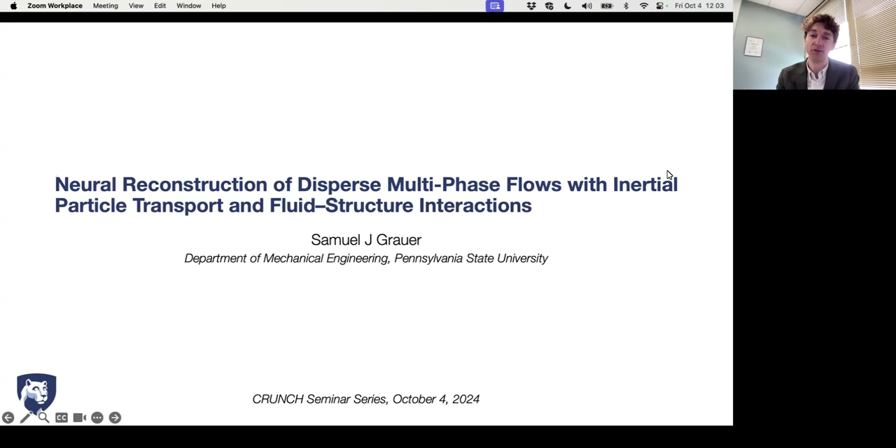So before I say anything else, I have to acknowledge my group who does excellent work, and it's a pleasure to work with all of them here at Penn State. Particularly with respect to the work I'll show today, I have a student, Joe Molnar, Ree Tang, and Ke Zhou, who've done most of the work. And really, this is largely Ke's work. So all credit goes to them.

Sorry, just got to close that out there.

All right. So what I'll talk about today is related to a measurement technique called Lagrangian particle tracking. I'm going to start by introducing that method and describing why we do it. Throughout the talk, I'll get into some of the complexities that LPT brings with it and why we need to think hard about the details of Lagrangian particle tracking if we want to use a PINN for reconstruction.

So to start off with, many flows in nature are turbulent, and also in engineering devices. We want to be able to utilize turbulence for our benefit or mitigate it in cases where it has adverse effects. So maybe we want to keep a boundary layer attached, and so we want a turbulent boundary layer to entrain momentum. We might want to promote mixing. We could also be trying to fight off drag and mitigate turbulence or reduce noise.

So the question is, why can't we just use simulations? Why would we need to do something like Lagrangian particle tracking at all? Many flows are challenging to simulate, so that's going to be the crux of the answer. This is especially true if you don't know the boundary conditions. I might have a flow where the area of interest in an engineering device couples to a very large system. I can't resolve the whole system, and I don't know what's coming in and out of the domain where I would like to simulate the flow.

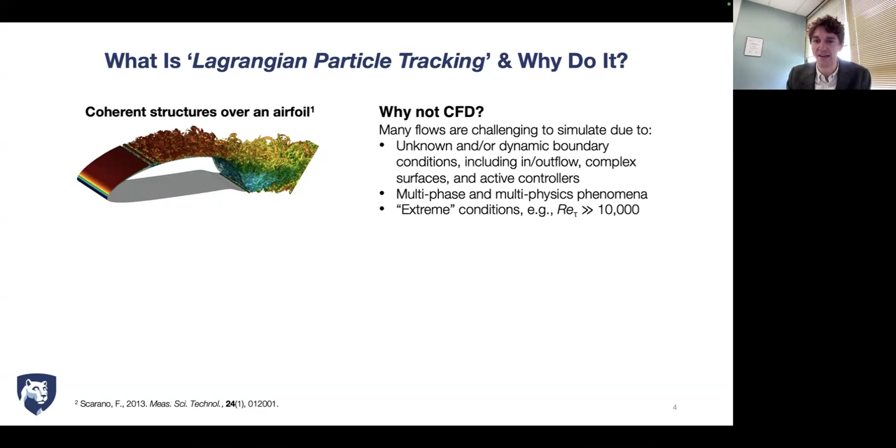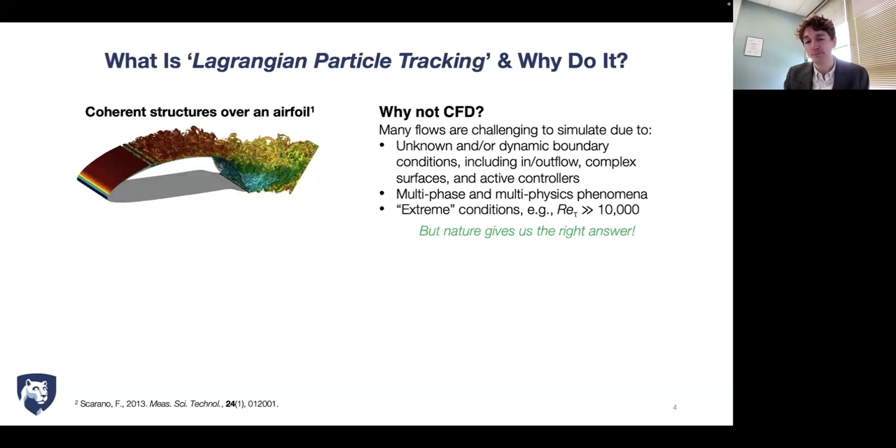And in many cases, we're dealing with really extreme conditions. If I've got a friction Reynolds number well in excess of 10,000, you're really outside the scope of what we can do numerically. But nature gives us the right answer. So we can use experimental techniques to observe how flows really work. That can be essential not only for understanding fluid dynamics, but also for specifying models that we can rely on in a design process.

That's kind of a starting point. And really, we would like gradients in all three directions. And so we'd like to be able to extract vorticity, and vorticity fluctuations are going to play an important role in the transfer of energy from large scales to small scales. And we would like to be able to observe those dynamics.

So we need to resolve a large dynamic range. We have to see large structures, and we have to watch them break down into smaller structures. So we might need a dynamic range on the order of 10 to the 3.

And we want to be able to accurately record fluctuating quantities, not just flow derivatives within the field, but also fluctuating quantities on bodies, such as pressure and viscous forces. And that's the kind of library of results that we want to have at our disposal, ideally, in order to really study the fundamental dynamics of a turbulent process.

And so that's going to restrict us to tomographic PIV and Lagrangian particle tracking. And for reasons I could discuss in the Q&A, I will basically ignore tomo PIV because it has resolution limits that make it less practical if you really want to do cutting edge measurements. And so we're going to go after Lagrangian particle tracking. And I know this is going to be a computational talk, but it's really important to understand the experiment to see how we're going to deal with the data.

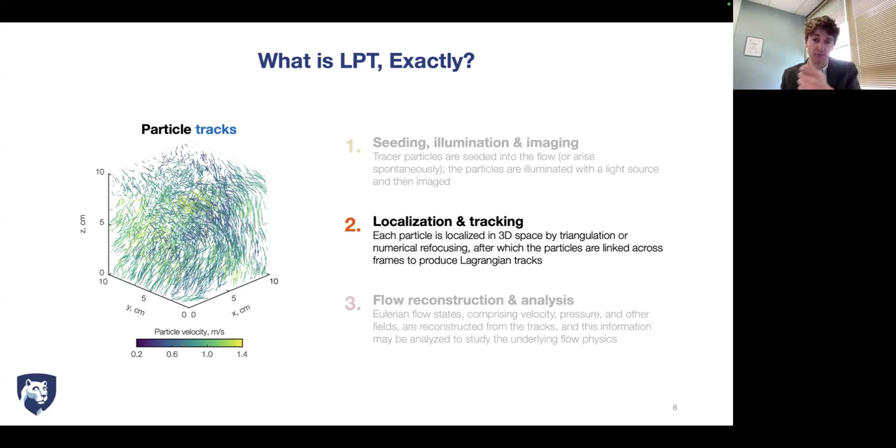And once you've done the tracking step, you get this scattered set of trajectories or tracks. They look like this. And that can already give you a lot of information, especially about Lagrangian coherent structures and statistics within the domain. But what we ultimately want to do, which can improve the accuracy of both of those things I just mentioned and open up new pathways of analysis, is to reconstruct the full Eulerian flow states. So that's what we're going to be after in this talk, is how do we do a good job of taking the data we get from LPT and reconstructing continuous flow states.

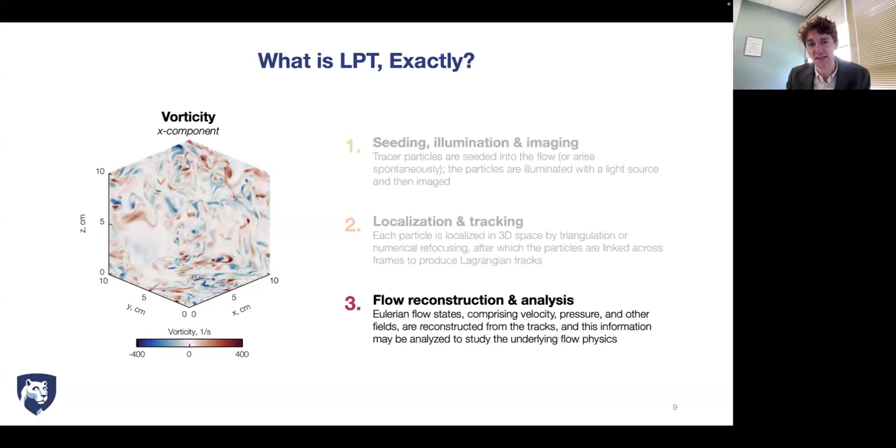So we're going to do that with PINNs, and we're going to use PINNs in a nice way that's going to allow us to really push the bounds of what we can do with them, both in terms of incorporating new physics, in terms of dealing with noisy data, and in terms of representing highly turbulent flows. And so the architecture looks like this. I'll walk you through it. It's modular, it changes depending on what type of flow you're looking at, but it's basically a fairly straightforward application of PINNs to LPT problems. So some of the challenge is going to come in how we deal with loss terms and so forth.

But to start off with, in my group, we usually use Fourier encodings. So we've seen nice recent results using Kolmogorov-Arnold networks, and we're interested in using the tweak where you have a spectral basis as opposed to the B-spline basis, which maybe can replace the conventional MLP and encoding combination. But we find that just including an encoding gives you a very robust increase in the bandwidth of flow states, the spectral content of flow states that you're trying to reconstruct. So it's a robust tool, and we always add them.

We then have a model for the flow, and here I'm drawing this as one network, but the thing to point out about it is that we found through pretty extensive testing that if you have flow variables with different spectral content, you're going to get more bang for your buck per parameter by having a dedicated MLP for each set of variables that shares an energy spectrum. So for instance, in homogeneous isotropic turbulence, you have -5/3 scaling for velocity, you have -7/3 scaling for pressure. You get a more efficient representation controlling for the number of parameters if you have a velocity net and a pressure net that are separate.

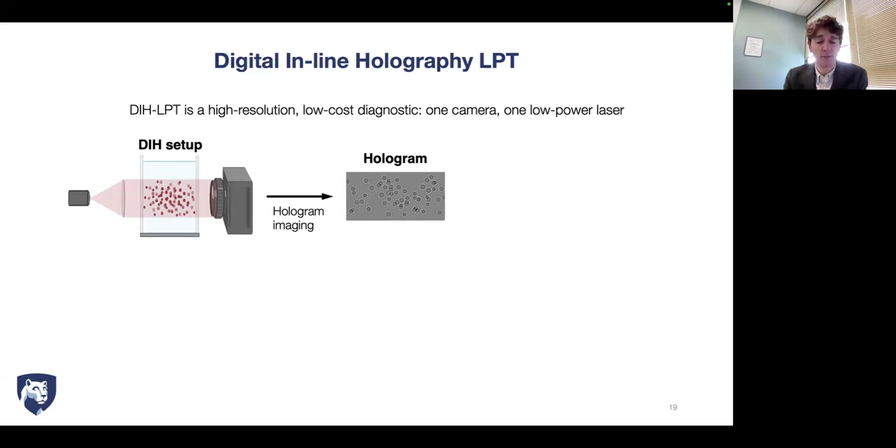The way it works is that you have a single camera, a single laser. You can actually do it with more lasers. That's how Professor Katz's group does that at Johns Hopkins. But in many cases, you use a single laser and a single camera. You spread your laser beam out into a slab and you image it onto the camera sensor. And if you've got particles in between, light is going to scatter off of the particles and you'll be able to record the interference pattern.

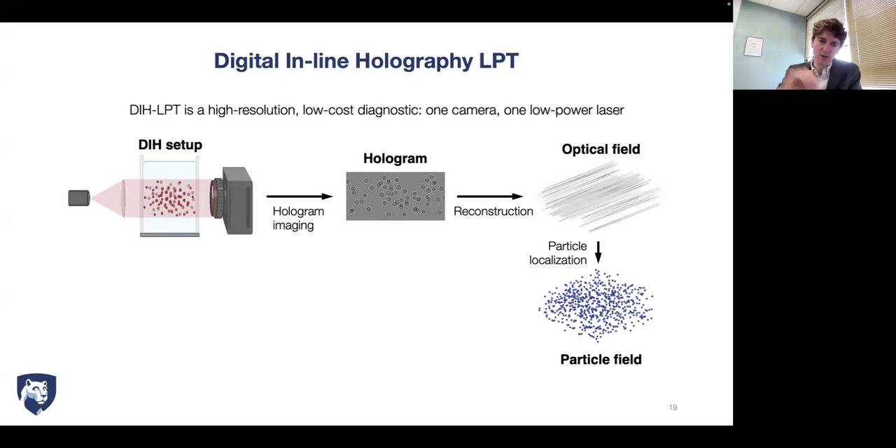So you get a hologram and you've got these particle dots with Airy disks around them. And you can numerically refocus that pattern to recover an optical field. And you can try to locate the particle. It's going to be at the waist of all of these optical filaments. And I can discuss this in more detail later, but it's not the focus of my talk here. But so you locate each particle, you track it, and you reconstruct the structures as always.

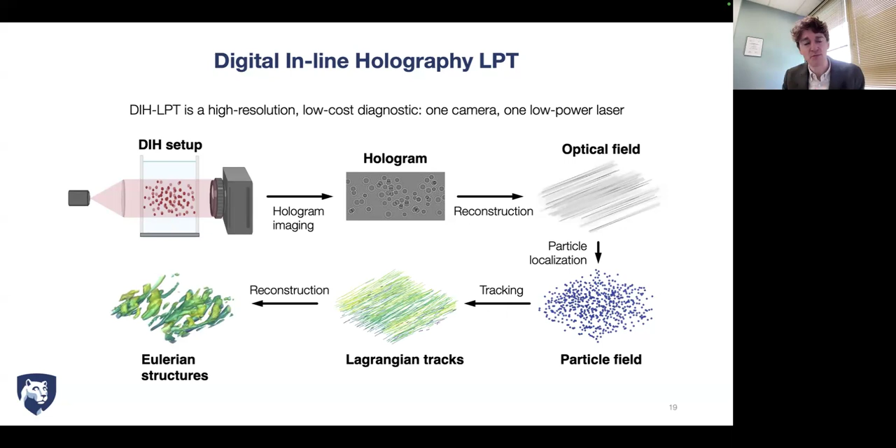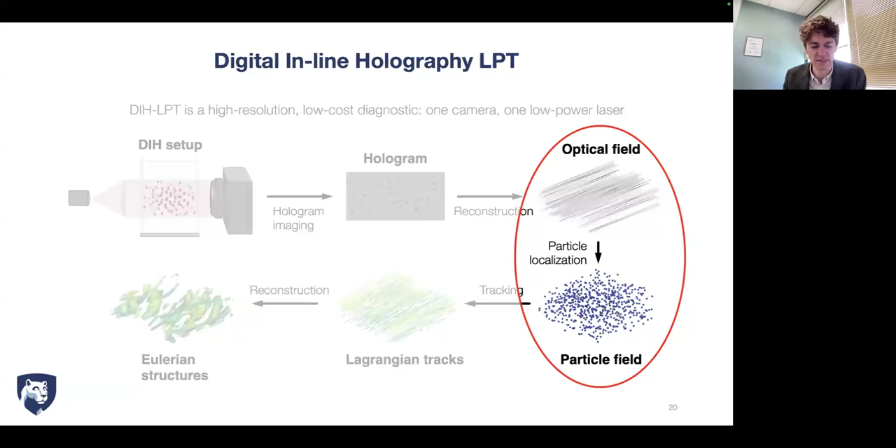What makes LPT hard is that we've got a depth of focus problem, and we have a single camera. And so we're going to get very noisy estimates of the particle position in one of the dimensions, which is the direction normal to the camera, so the optical axis. We're going to have very large uncertainty. And so the resulting distribution is going to be anisotropic, which means that if you just have a default treatment of the particle positions, you can end up with big problems, as you will see.

So at the beginning, we're just going to have an implicit particle model, meaning that our assumption is the particle is a faithful tracer that follows the flow, and we can just deal with outputs of the flow model to determine what happens to particles. So we don't have any special model for the particle.

What most people do when they reconstruct Lagrangian particle tracking data is they say, okay, I've got the particle at position 1 and position 2. I'm just going to do delta x over delta t. That's my velocity, and I'll assign it to the midpoint. And then I just take the outputs of my PINN. So I query the PINN at that midpoint, and I compare the velocities, and that's what I use to train it. That's the data loss in my network. And that's okay in many cases, but as soon as you want to go to high-speed flows, you start to encounter problems with that assumption that you've got a uniform velocity from time 1 to time 2.

And we're going to have bigger issues if we want to deal with anisotropic distribution of particle position errors. So the first thing we said is, well, you could just integrate the particle position. So I've tracked the particle at time 1. I've tracked it at time 2. If I take my PINN solution and I integrate it between the times, I will get another position at time 2, and my data loss can just be the difference between those.

But you have to have quite large interframe spacing, and the frame rate has to be relatively low in order for this to be very helpful. Where the technique becomes helpful is when you consider the distribution of uncertainty. So what we do is we have a localization PDF for the particle, and we can advect that entire PDF. So you can do that in a variety of ways. You can do advection of an arbitrary PDF through Monte Carlo sampling.

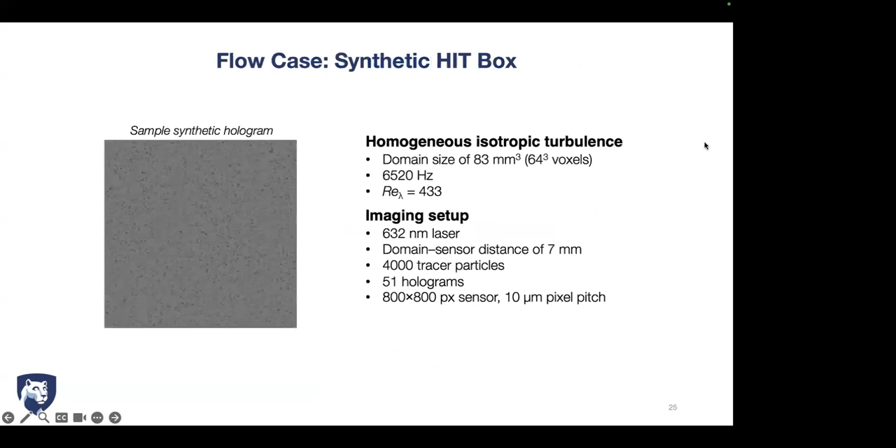Hi, Samuel. Hi, this is Juan. I have a question. Yes, please.

Could you please explain again this part? You're starting with your X1, X1 hat, and then you use your PINN to move to the next step. How? Would it be just like asking your neural network to predict X2? Sorry, I should have been more clear about that. So your neural net, you have the flow model. So you've predicted velocity at the point where the particle was located. And if I predict velocity, I can integrate that over time from time one to time two. Oh, okay.

So you're integrating. Yes. Okay, and how are you integrating it? So we used a second and a fourth order Runge-Kutta method. So it's explicit integration. Oh, okay, I see. Great. So it's somehow similar to the idea of neural ODEs, right? Because they define a model for one state and they move forward using Runge-Kutta or time stepping. Yeah, in a sense, yes. In that we're integrating the outputs of the network.

So in that sense, it's quite similar to a neural ODE, except that we're not trying to discover that dynamical system here. So we're not trying to discover the dynamics. We're trying to discover the flow behavior. We're learning the velocity. It's very similar though. You're right. There's a strong analogy. Oh, okay, great. And then you do it many times for each particle? We do it for each particle, and then actually in the stochastic technique, we do it for each particle many times.

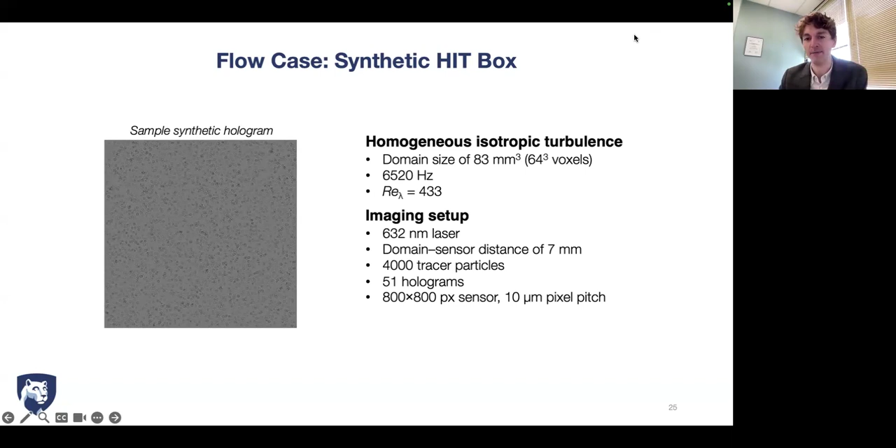But basically, we form the holograms. We do the standard workflow for getting the particle positions and the tracks out of this kind of data. This is just a representative hologram, what it looks like. So remember this picture. When you see the experimental hologram, you'll see that this is very nice. So this is quite ideal. And then this is what reconstructions look like.

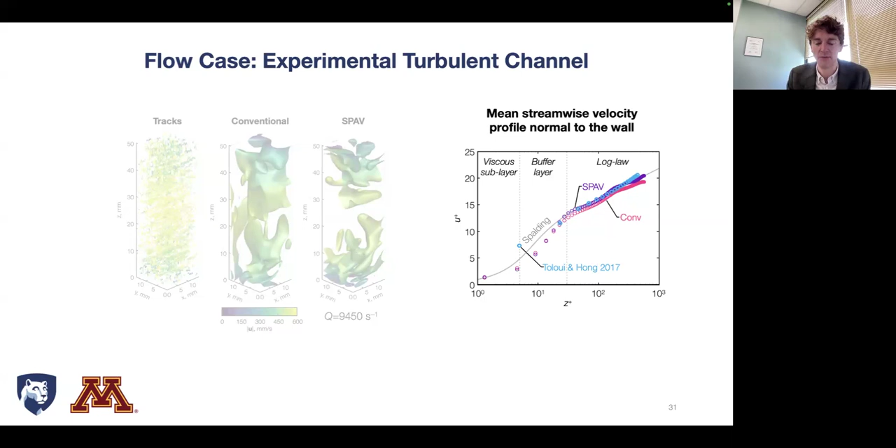But SPAV was very expensive. So for each particle, we're doing thousands of samples for each step to get that advected PDF. And so we wanted a way to just get to the maximum likelihood estimate in a single step. And that also unlocked the techniques that we ultimately developed for dealing with inertial particles as well.

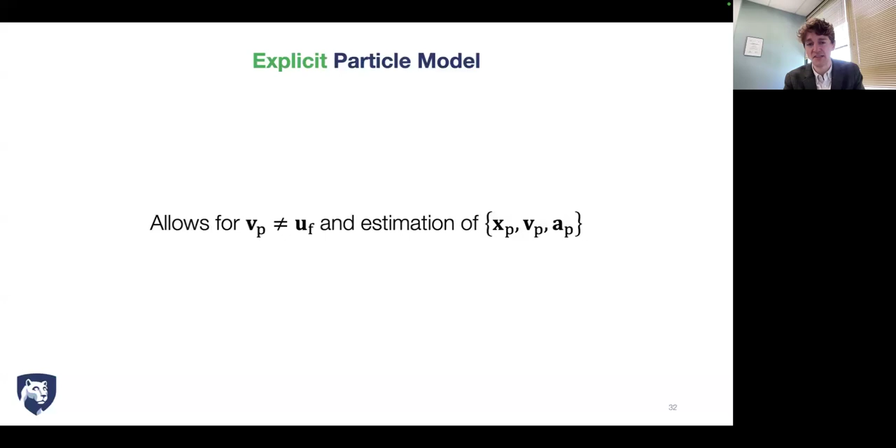So what we do now is we introduce an explicit model. So instead of just having a PINN, we're going to have a PINN and something else, which is going to describe the velocity of the particle. And that velocity doesn't have to equal the velocity of the fluid anymore. I mean, sometimes we will want it to, but not in every case.

And so we start off with just a schematic representation of a track, and we're going to use something called the theory of functional connections to ensure that the kinematics of this particle trajectory are respected. So our model is going to look like this. P is the model. We've got some set of parameters, theta, and the K is the index of the particle. And it's going to map a time to the velocity of the particle at that time.

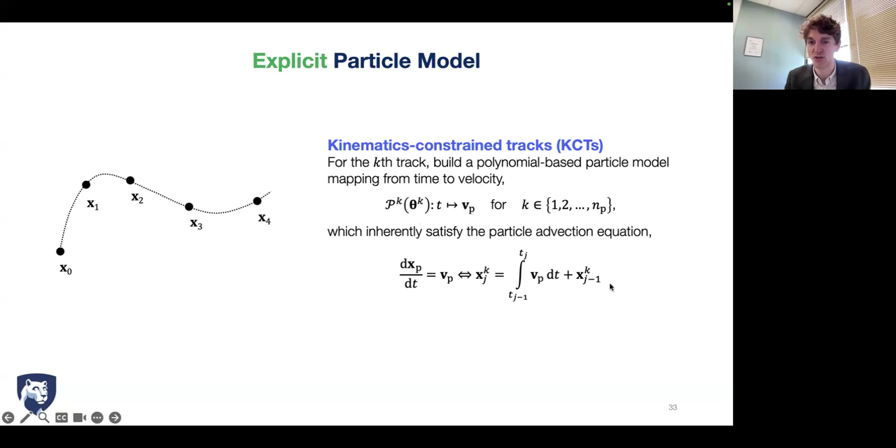And so if we were to integrate that velocity, we should get that the integral from time 1 to time 2 always satisfies the displacement between the tracked positions. And theory of functional connections gives us a way to enforce this as a hard constraint while we retain an unconstrained optimization of a free parameter. That comes from Professor Mortari at Texas A&M.

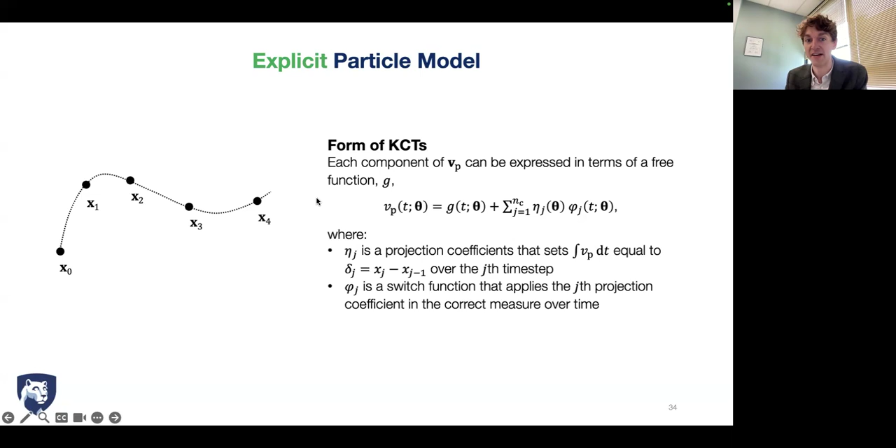And so this is just a single component for simplicity, but we've got a free function G, which can take any form. And we've got a set of constraints that I won't go into in detail, but we've got a preprint which gives the derivation in a nice sequence. We're going to have projection coefficients, which are going to ensure that that integral is satisfied, and then switch functions that turn those projection coefficients on and off. And the result is that for any free function, I can come up with these constraints such that the resulting function will always satisfy that advection equation.

So I'll skip over some details that aren't super important here, but we can factor that into a matrix form, which is going to be very nice for inputting it into TensorFlow or PyTorch, or pick your favorite differentiable programming environment. And so we've got a vector of times, so just polynomial increments of t, and we've got some matrices that we can compute ahead of time. The important thing that I want to note is we've got this vector delta, and that describes the displacement between particles. So if I really trust my data, I can just ensure that that is respected as a hard constraint.

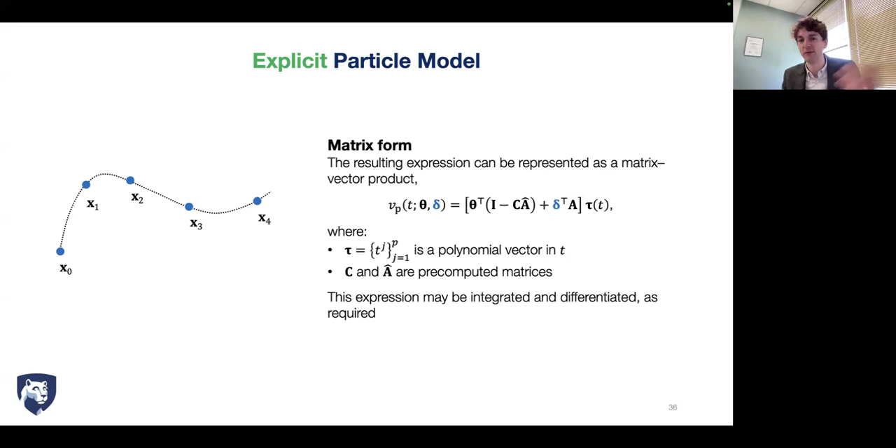But if I don't necessarily trust my data, now I can shift these particle positions around without changing anything else. And so then I can have a data loss, which says, well, I expect those positions to be close to where I tracked them, but I will use the PDF that I described earlier, this localization PDF, to discount particle positions that are very far away from the track location. But we've got some flexibility.

And then we've got this totally unconstrained parameter theta, and unconstrained is nice because we want to use SGD to optimize these alongside the PINN. And so these are random draws from theta, and you can see that no matter what I say for theta, I will always get a velocity history that integrates to the tracked positions. So this is the explicit model that we're going to use in the optimization. We've got one of these for each particle. And, like I've been saying, we can optimize theta and delta, and no matter what, we're always going to satisfy that advection equation. And we can also just fix delta if we've really got highly trustworthy data.

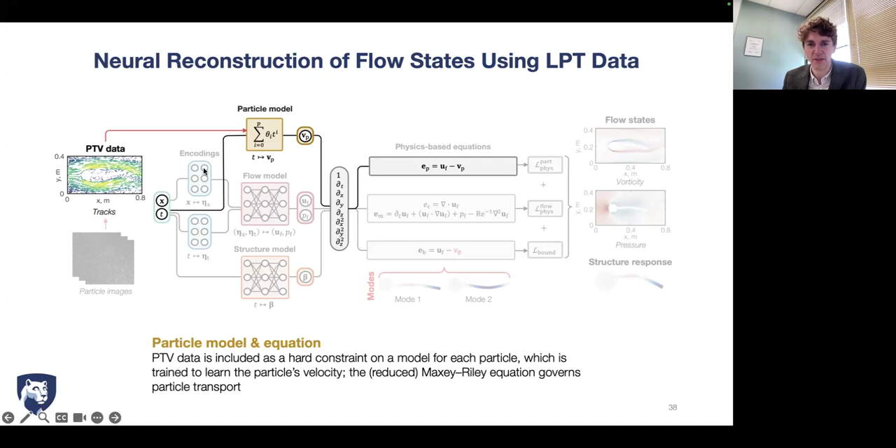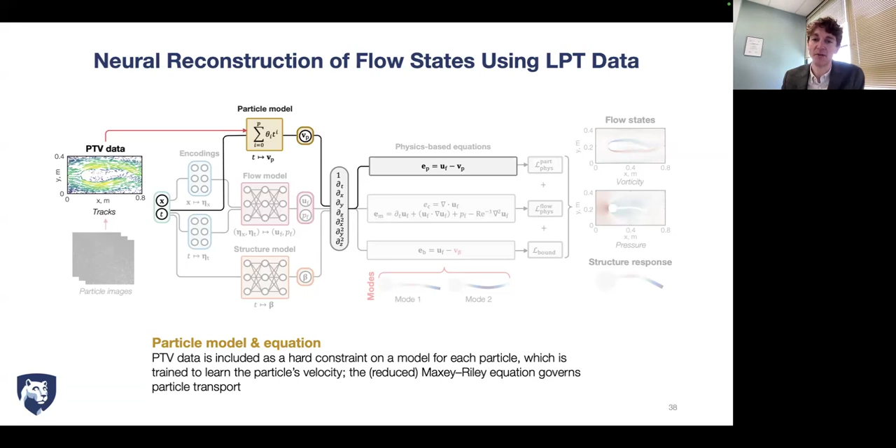So all of that relates to that yellow box from before, the particle model. And so we have a physics equation which says that I expect the velocity of the particle to match the velocity of the flow. We'll relax that later. But for now, we're just going to assume that we do want those velocities to match. But we're going to allow the position of the particles to float.

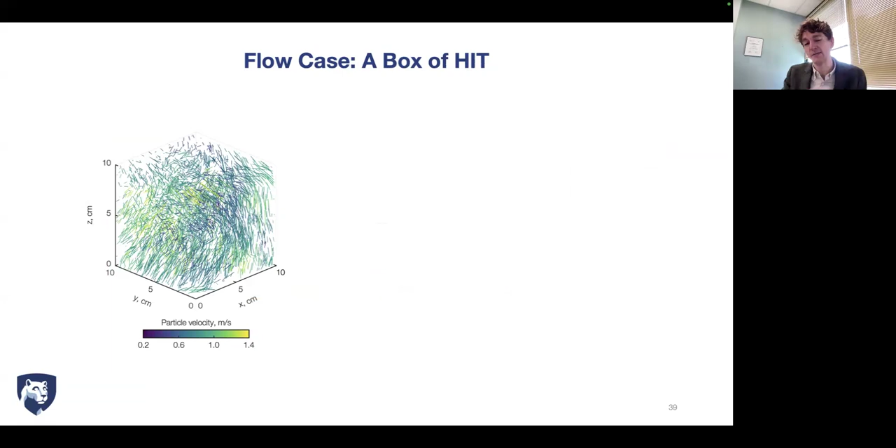And so here I'll show an example where we've actually got a much lower magnitude of noise. And this is inspired by a more conventional PTV experiment. And it's a much larger box, so this is already getting to be quite a turbulent flow. The level of turbulence is the same, but the bandwidth of the function that you have to represent is much broader now. We've got more low frequency content.

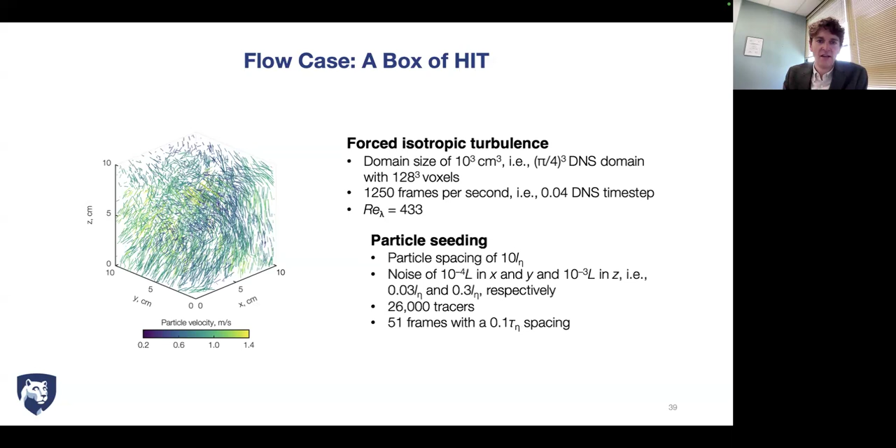And so again, we've got some information about the experiment, which I can come back to if people are interested in it. But the takeaway message is the reconstruction. And if you look closely, here again, we've got a snapshot of the DNS. We've got U, V, W components of velocity and pressure. And all of these reconstructions are quite good. The level of noise here is about a factor of 10 lower than for a digital inline holography experiment.

But you can see if you look very closely, and I'll show you errors, that if you inspect these, you do have higher frequency content being resolved as you go from the conventional technique. So just assuming that the velocity that you get from your track, so maybe you've got LaVision software, or maybe you've got your own tracking software, but if you take that velocity as the truth, you're doing a bit of filtering because you've got errors in your data. If you do SPAV, you get a better result than if you do the conventional method. And if you do this neural-implicit particle advection thing, which I've described just now, so this explicit particle model, you're going to do better still.

But a key point is that we've reduced the cost by nearly an order of magnitude by shifting from SPAV to NIPA. So now the cost is totally on par with the conventional method. And so simply by adding a particle model, we can deal with the noise more effectively. And by eye, if you look at errors, you can see, okay, we've got high errors and then we've got smaller and smaller errors. So you're getting a much more faithful reconstruction the further you go.

And I have a question because before you used, I think, the same database and the conventional was not as good. What makes conventional good in this case? Yes, so this is just the data sets I had on hand for making slides, unfortunately, but this is much cleaner data. So it's about an order of magnitude less noisy than the DIH. What do you mean cleaner? So this is recorded with multiple cameras, and the particle localization step is very accurate. Oh, so it's an experimental data set. This is still synthetic. So I'll show experimental data in a few slides.

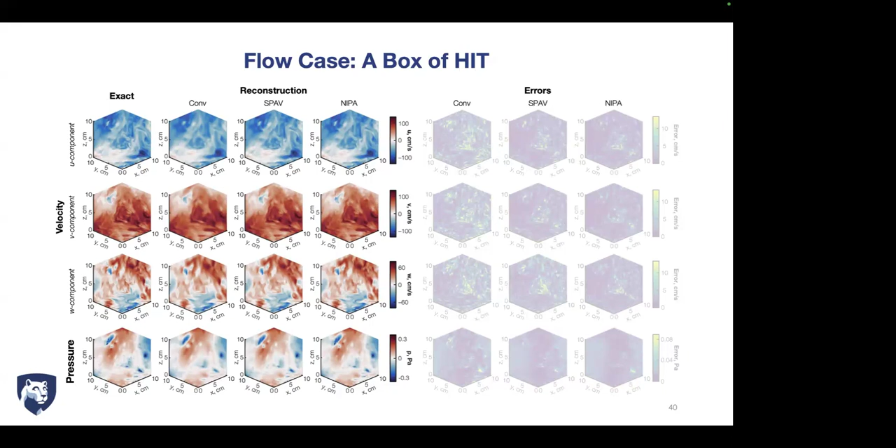How do you introduce the noise? It's random Gaussian errors with a slightly elongated uncertainty along the Z. Okay, that's a better way of saying it. Okay, sorry. I'm used to talking to experimentalists, and so then it's like, oh, sure, representative noise for multi-camera. But yeah, it's additive Gaussian noise. We've got a factor of 10 to 1 uncertainty in the Z direction. Got it. Thank you. Yep.

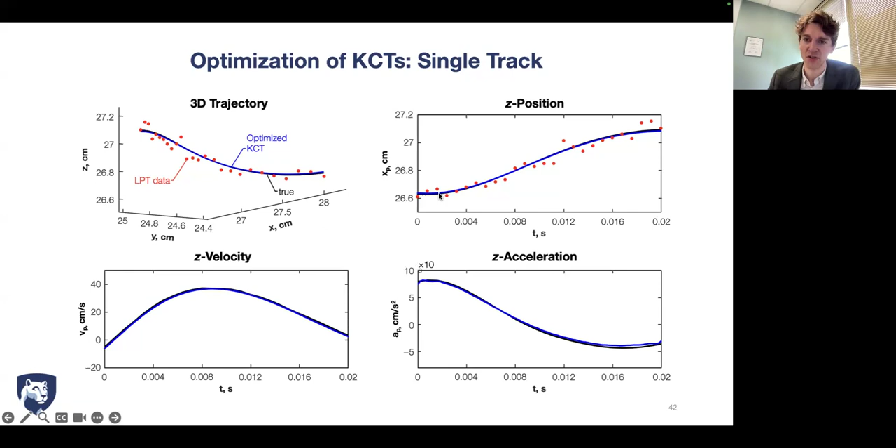So the optimized track is sitting totally on top of the black track. You can kind of see it if you squint and look at the ends, but the optimization is quite effective. So the algorithm is moving the particle positions around, and it's trying to find a track that's consistent both with the data that you've recorded and also with the flow that's going to satisfy the governing equations. And so if you look at position, velocity, and acceleration, this is all in the Z component, because that's the direction where we're more noise affected. We have a very accurate resultant track estimate after the optimization.

So we did extensive benchmarking, and that's where this notion of the camera came about and why we wanted to understand how this worked with the much lower levels of noise. We did an extensive benchmarking campaign with LaVision and with the DLR. And the reason for that is that those groups have produced the VIC# algorithm within the LaVision DaVis toolbox, which is probably the predominant commercial tool that's used for Lagrangian particle trajectory

or tracking, sorry. And the DLR has a FlowFit algorithm, and between the two of those are sort of the state of the art in what people do for data assimilation for LPT in general. I think both of those groups are probably interested in experimenting with PINNs now, but these are sort of the legacy algorithms that they've developed over the last decade or so. So we wanted to see how the PINNs compared. There were a lot of synthetic tests. I can send a conference paper which details those for anyone who's interested.

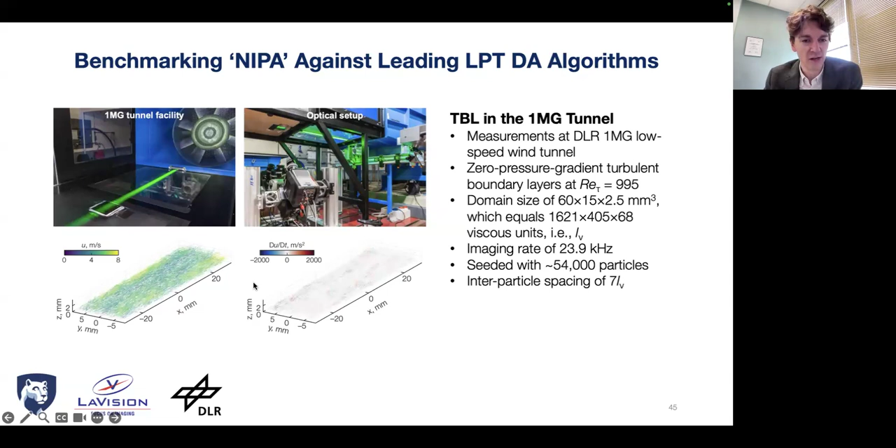But we also did a turbulent boundary layer that was measured at the DLR in Göttingen at the 1MG tunnel. And so this had a friction Reynolds number of approximately 1,000, and they were able to track 54,000 particles, which is quite a lot. I'll show nice reconstruction results, but first I'll just show you the results of this, which will be enjoyable to folks who like PINNs.

So what we did to benchmark the accuracy of the algorithms is we kept 20% of the tracks as test data, and the algorithms were cloaked to those tracks, and we used 80% of the tracks for reconstructions. And we did reconstructions first with all of those 80% of the tracks, and then we cut the 80% in half, and then we cut it in half again, and then we cut it in half again. And so we went from on the order of 50,000 particles to on the order of 4,000 particles.

So these are isosurfaces of the Q criterion field using the different methods, as well as a binning method which performs quite poorly. But if you look at the structures here, you've got a lot of corruption due to noise in the FlowFit from the DLR and in the VIC# from LaVision. And so it's a challenging flow case to reconstruct, and the algorithms work very well across a large range of flows. But once we go to this kind of condition, we're at an operating condition where the PINNs are able to provide a large benefit in terms of reconstructing flow derivatives with a high degree of accuracy.

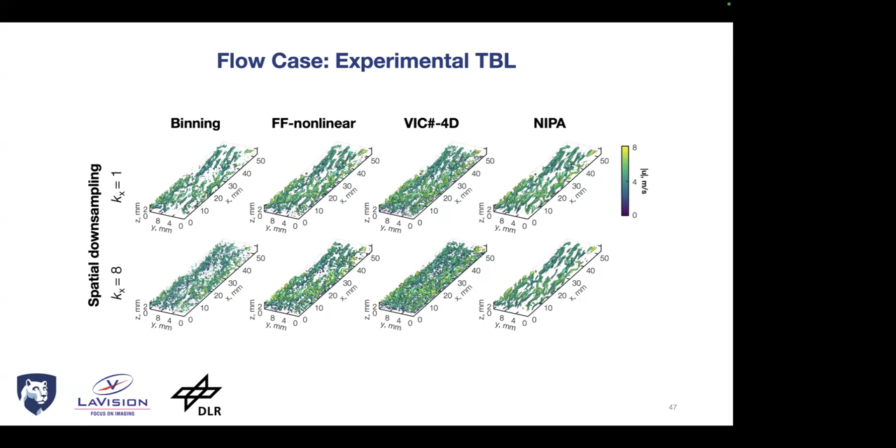Can you say something about VIC? Because it's totally wrong. It seems that it spreads fictitious structures which are not there. Yeah. So there's a couple things to say about it. I'm just trying to think of the order in which they use a sequence of steps in the reconstruction. They've assumed inviscid flow, and because this is very near wall, I think that's probably a contributing factor to what you're seeing, the amplification of noise in the field there.

And what they do is, I'm trying to think of a good way to explain it. They estimate the vorticity field, and then they can estimate the material derivative of vorticity, and then they use the vorticity transport equation, and they solve a sequence of Poisson equations to get from vorticity to velocity to pressure. And then those fields get included in an optimization. I haven't worked on the inside there, so I'm not sure about the details of how that algorithm works, except for that level of description. But the other thing that I should say that's a little bit exculpatory here is that these are flow derivatives.

So if you look at the velocity field, the large scale structures are pretty accurate across the board. But the small scale features are relying on this very multi-step process that they're going through to reconstruct the field, which involves, they parameterize everything in terms of vorticity, they solve multiple Poisson equations, and the instantiation of the vorticity transport equation assumes viscosity 0. And so my assumption is that that is probably one of the limiting factors in the reconstruction.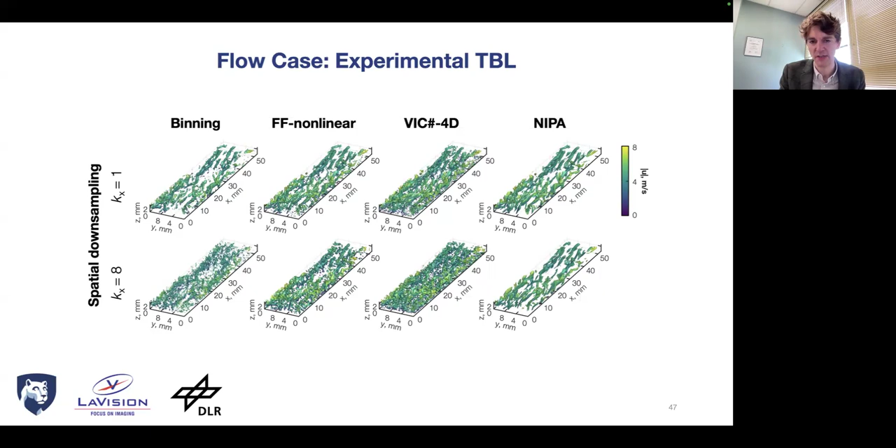And then we looked at pressure as well. And so this is going from the full reconstruction with all the particles to the reconstruction where we have the fewest particles. We said, well, let's assume that pressure is pretty good in the case where we've used all the particles. And this kind of gives you a sense of that qualitatively. So even though we had those problems with the Q criterion field from VIC#, the pressure structures aren't bad. They look pretty good qualitatively, even in this case with only about 4,000 particles.

But there's an issue in VIC# that we don't totally understand where it comes from, where you've kind of added a large-scale pressure gradient. But the PINN-based technique and the DLR method, they actually perform reasonably well on pressure, even when we've downsampled the data a lot.

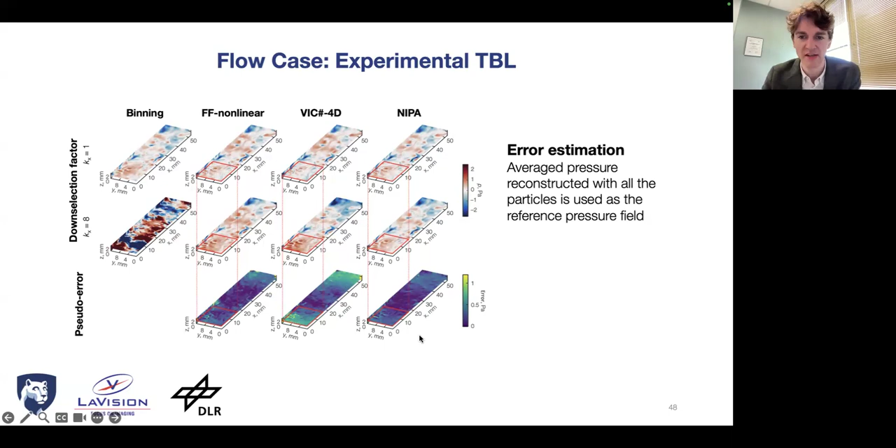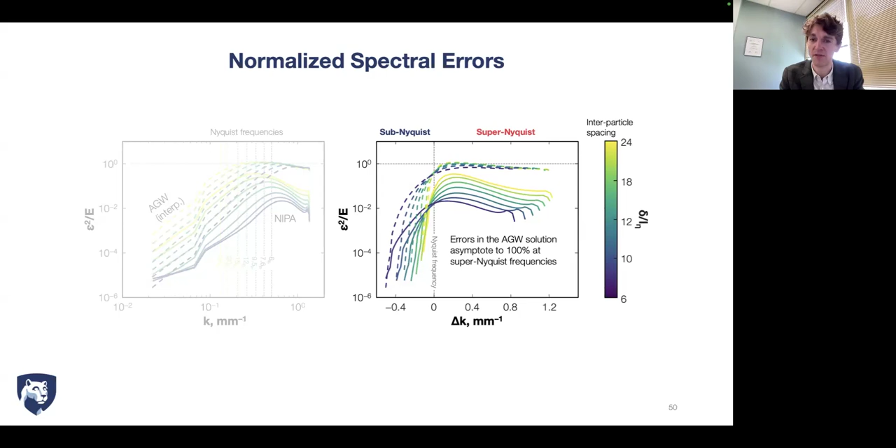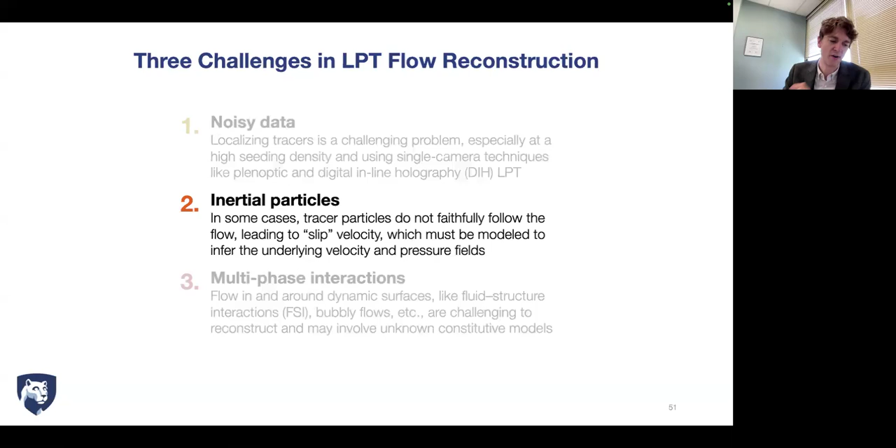So I think the most interesting part of what Ko has done in this work is his work on inertial particles. And this becomes really important in a lot of LPT experiments. So with cases with noise, there's various ways of dealing with it. Once you get to inertial particles, you have to consider additional physics, and there's not really another option. So this is an animation of a stagnation flow, just to give you a sense of what I'm talking about.

There's streamlines in gray, streak lines in gray, and we've got particles that are colored by their Stokes number. So these would be bigger or smaller particles, or heavier or lighter. And the very bright particles have a high Stokes number. The very dark particles have a low Stokes number. And if you look closely, you can see that the dark particles kind of follow the streamlines much better than the light particles.

And so for Lagrangian particle tracking experiments, we're going to be dealing with particles that are quite small relative to the Kolmogorov or viscous length scales of the flows that we're looking at. And so we can use the Maxey-Riley equation to model the particles. And so we're going to write it out in this form here. Because I'll talk about air experiments, I'm going to ignore everything in orange. So I'm going to look at viscous drag and buoyancy effects.

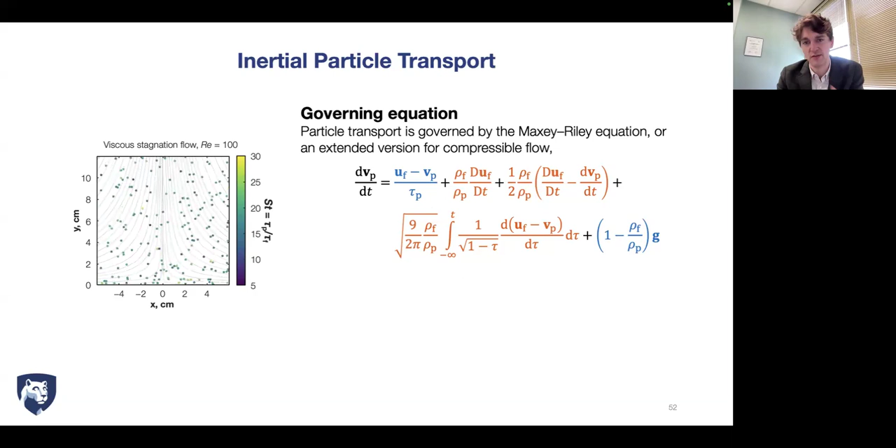But if we were dealing with a liquid phase experiment, we would have to consider the full equation, which is not challenging to do. The PINNs make it actually quite easy to handle the full equations. But for what you'll see, we're only going to have these 2 blue terms. And in the first case, we'll be able to assume that we've got creeping flow. So we've got a particle Reynolds number that's much less than 1.

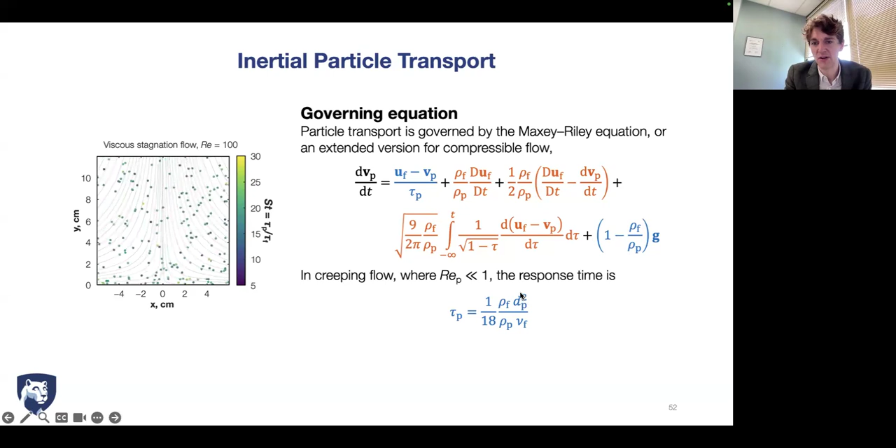And so then we can produce this simple expression for the relaxation time, which is basically a characteristic time scale that will say if I impose a step change of velocity for the flow surrounding a particle, what's the exponential convergence rate for the particle to catch up to the flow speed? And so that's going to be a function of the fluid density and viscosity, but also the particle density and the particle diameter. And that's going to be important.

Okay, so again, why do we care about this? Well, if we think about some real experiments, this is some beautiful data taken by a good friend of mine, Vedant Nair at Georgia Tech. And this is jet in crossflow particle image velocimetry. And here you see these beautiful dots. And you see a jet, and you see this nice vortex roll up at the outer shear layer. And what you'll notice is that you've got these black cores, and those are the cores of the vortices, and they're totally void of particles.

And Vedant was using titanium dioxide particles in this experiment, which are very small. They're on the order of 100 nanometers. But the particles tend to cluster together due to intermolecular forces, and they can be more on the order of 1 micron to 10 microns by the time they reach the measurement domain. And at that point, they will have an appreciable Stokes number.

And so if you look at this kind of data, and if you take these tracks, and if you say that you're going to assume that velocity is the flow velocity, you will get the wrong answer, because those particles become inertial by the time they come into your domain. And if you see features like this, vortex cores void of particles, you have to somehow extend your treatment of the data to account for the particle dynamics.

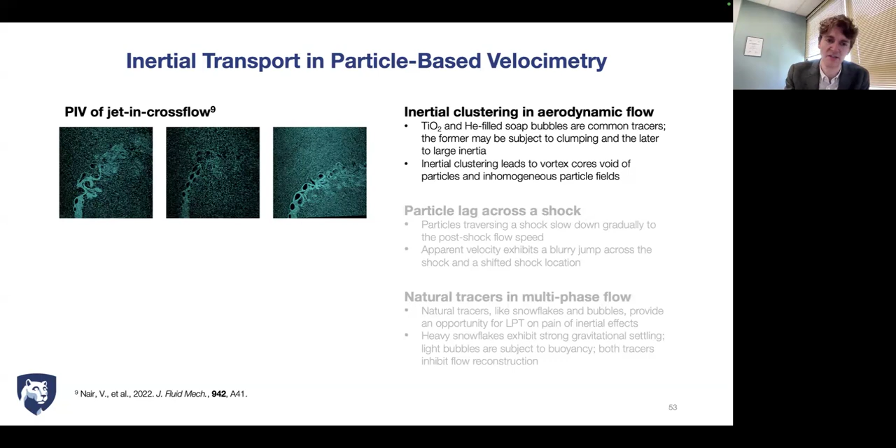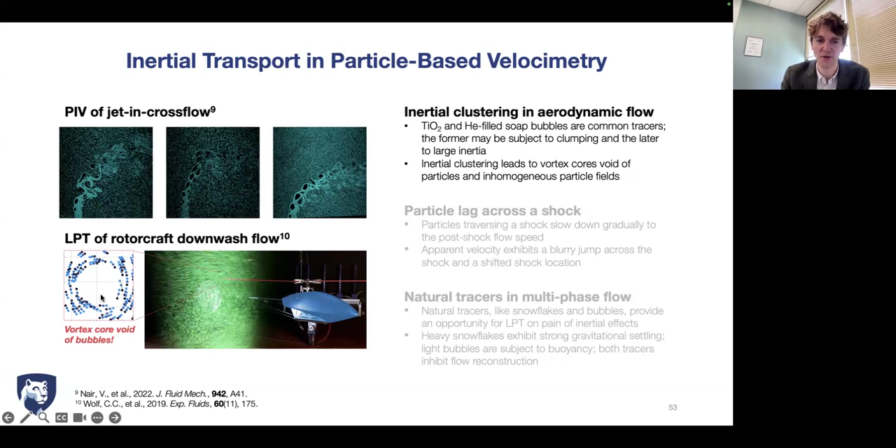You see a very similar thing in a lot of rotorcraft experiments. So these are bubbles in this case, helium-filled soap bubbles. And this experiment was done by LaVision and DLR. And again, they've got these vortex cores that are void of bubbles. So you know that the bubbles are kind of getting spun out of those cores.

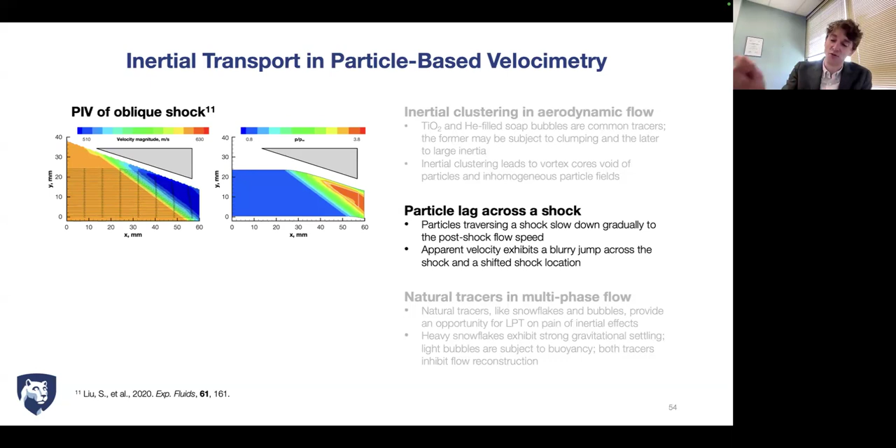Another big area that we're interested in is dealing with shocked flows, and particles are going to struggle to keep up with the flow when you go through a shock, or actually, as you go through the shock, the particles kind of punch through and they travel ballistically, and then in the expansion fan, they're going to lag the flow as it speeds up much more quickly than the particle is able to, and that results in blurring out shock waves and moving them into the wrong position.

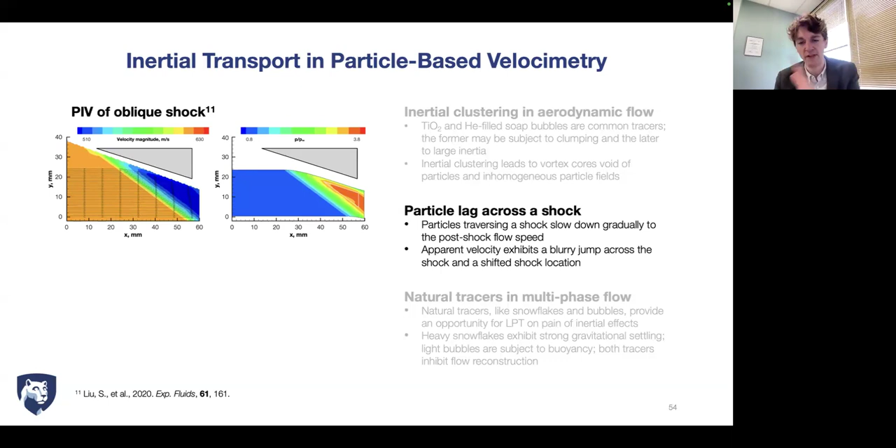And so for many experiments where people are tracking particles, they're going to deal with the transport of the particle not matching the flow properties at that location, and then we want to be able to accommodate that data with our PINN.

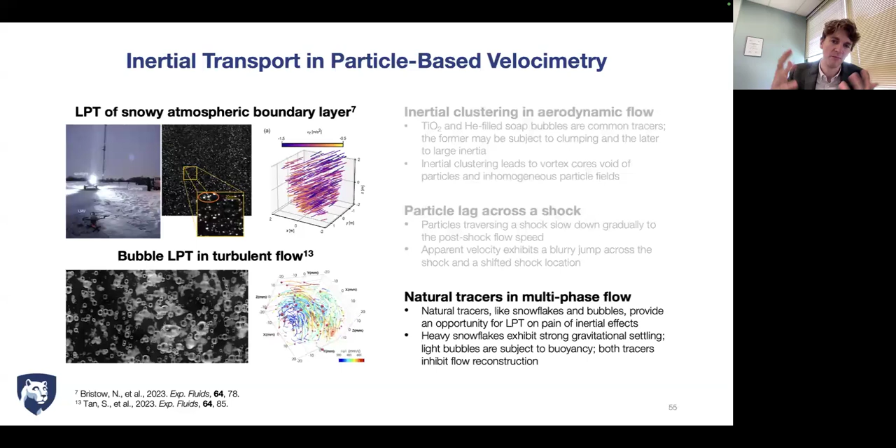So I'll go through two cases. In the first case, these are both synthetic. We're working on experiments to deal with these at the moment, but we have not done this experimentally yet, but we've got very strong evidence that suggests that we can deal with this kind of data.

So this is a bidispersed case, and we're going to revisit that same homogeneous isotropic turbulent flow. And so we've got two sets of particles. We've got a small set of particles, and they're colored by their diameter in these plots. And those particles are about on the order of 20 microns. We've dimensionalized the flow to be air. And the large particles are about 70 microns.

And you can see that these small guys are kind of swept around isotropically. But they have a Stokes number on the order of about 1, so they're about 100 times higher Stokes number than what you would want for a PIV experiment. The large particles have a Stokes number more on the order of 5, and there you can already see that you kind of get this aggregate settling behavior.

And the data that we get is that we have all of these mixed up together, and we do not know anything about the particle diameter. So what that means is that we're solving Navier-Stokes equations with the PINN, but we also have to be able to solve a Maxey-Riley equation for each particle with a parameterized diameter. So we don't know the diameter of any of the particles a priori.

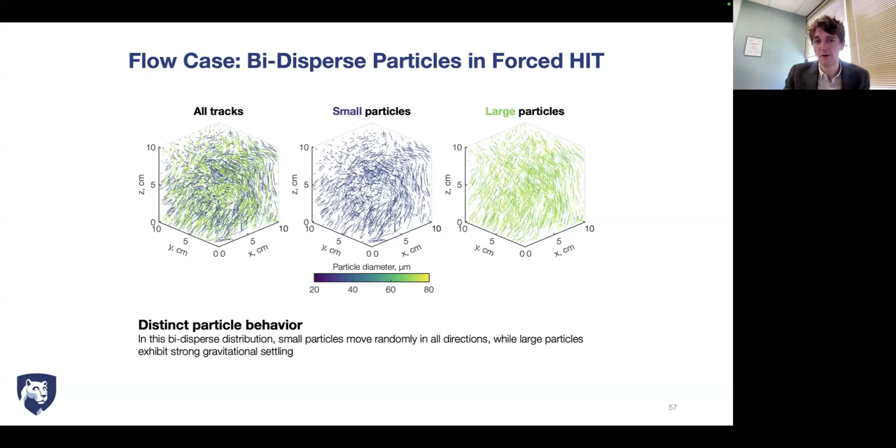Again, we've got the same exact flow state to the left. If we were to reconstruct this using the best method we have, so we use the method that I showed you earlier where we're trying to change the particle positions and so forth and trying to get an accurate reconstruction, except that we don't model any of the particle dynamics. So we say the particle's a tracer. So flow velocity equals particle velocity.

We get results that are qualitatively okay in the X and Y directions, but in the Z direction, you can tell that we've been totally thrown off by the settling behavior. And if we don't get all three components of velocity, we cannot reconstruct the pressure.

When we do the full model, where we're trying to recover not only the flow states, but also determine the properties of each individual particle and solve the Maxey-Riley equation for each particle, we get a good reconstruction, and this becomes especially pronounced if we look at the errors. So even when we thought we had qualitative agreement, we actually had quite large quantitative disagreement.

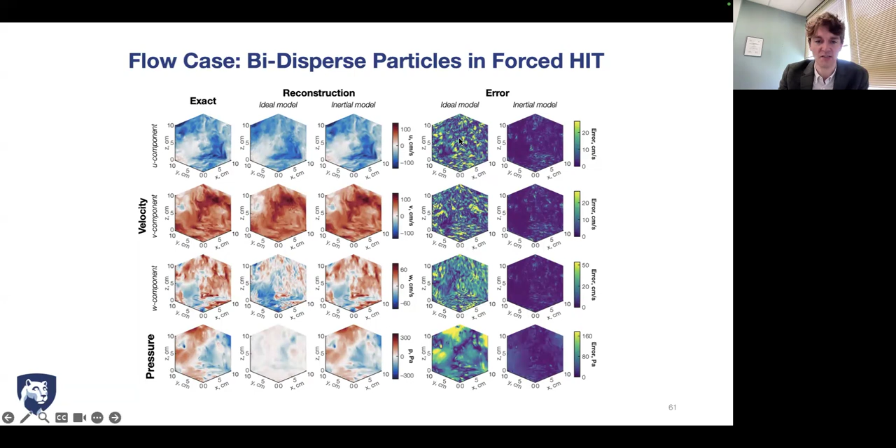And that's because even those small particles were not tracers. They were not faithful tracers. They had large Stokes numbers, and they gave us the wrong velocities. Whereas with the inertial reconstruction, we get everything quite well. So you get nothing really in terms of flow derivatives with that model where we assume faithful tracer behavior.

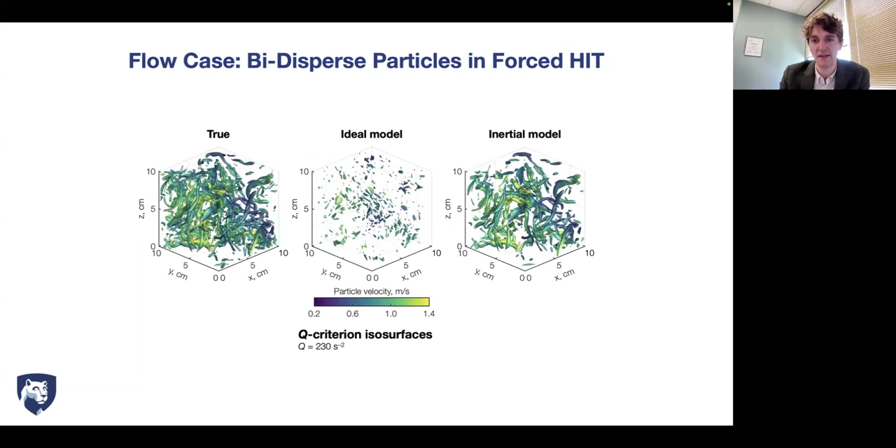When we assume that we've got inertial particle dynamics and we try to get everything out of it, then we can get good estimates of the flow structures. We don't get absolutely everything, but we get a lot of the derivative content correct.

And what's really striking is if we look at a joint probability density function of the particle diameters that we've estimated. So on the y-axis here, we've got our estimate for the particle diameter, and on the x-axis, we've got the real diameter. You can see that at the beginning, we initialized with a distribution that was totally incorrect. So there's no mutual information between the predicted particle diameter and the true value at the outset.

But then once we trained the network and did that reconstruction, so this is together with the flow reconstruction optimization, we've managed to get the size of each particle with a very high degree of accuracy. And so not only did we classify them correctly as small or large, we actually get the size right within those distributions.

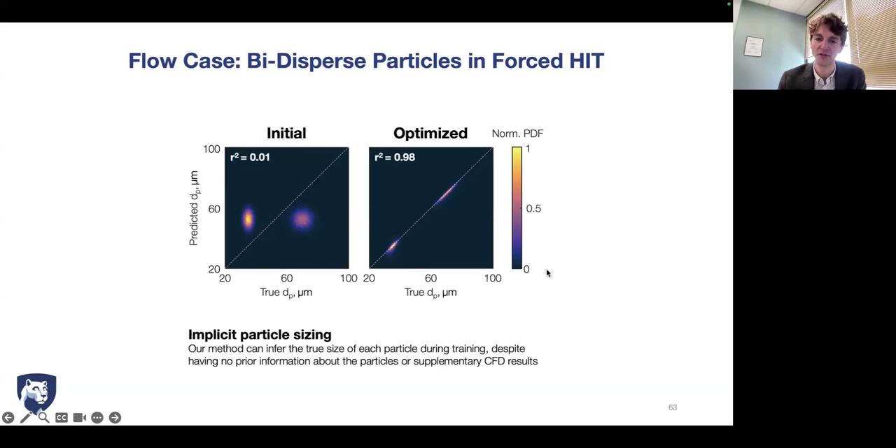What we're really interested in is doing this for supersonic flows, because that's where these inertial effects become totally unavoidable. So we came up with a physical regime where we expect to be in a supersonic wind tunnel. So we'll be testing this next year with AFRL, but we don't have experimental tests at the moment.

And for now, what we've done is we've done a steady case. So time-resolved cases are being performed now, but the first thing we did is we just did this with a steady reconstruction.

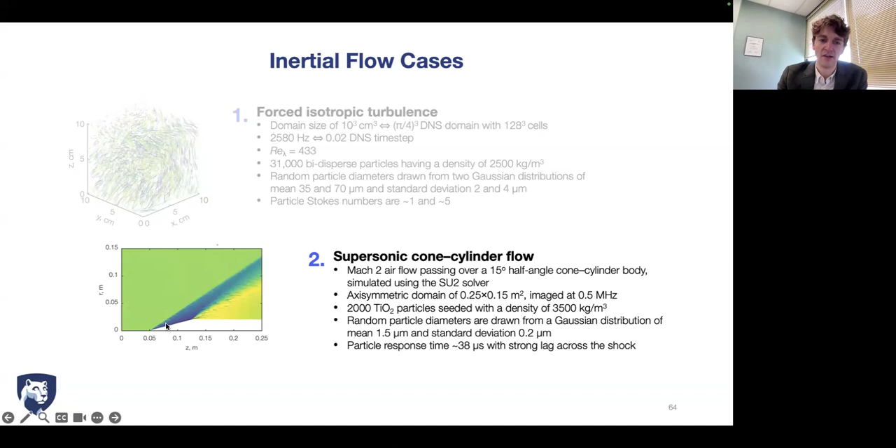So this is an axisymmetric cone cylinder shock structure. So we've got the shock attached to the nose of the cone, and we've got an expansion fan in the wake. And the number of particles and interframe time corresponds to what we could actually do experimentally.

So this is a flow speed plot, but you're also seeing the particle speed. So if you look, you've got all these streaks that are going through the shock and then in the expansion fan here. And that's when the velocity of the particle does not match the velocity of the flow. So upstream of the shock, the particles are in equilibrium with the flow, and you don't see any streaks. Within the shock, you see a lot of streaks because there's a big difference. There's a large slip velocity.

A point I could make in a more extended way later is that a lot of people treat particles in PIV experiments as if they have a constant relaxation time, but that's not actually sufficient because when the particle passes through the shock, the compression and rarefaction effects are very sensitive to the local conditions. And so you're going to get a response time of the particle that can change by up to 50%.

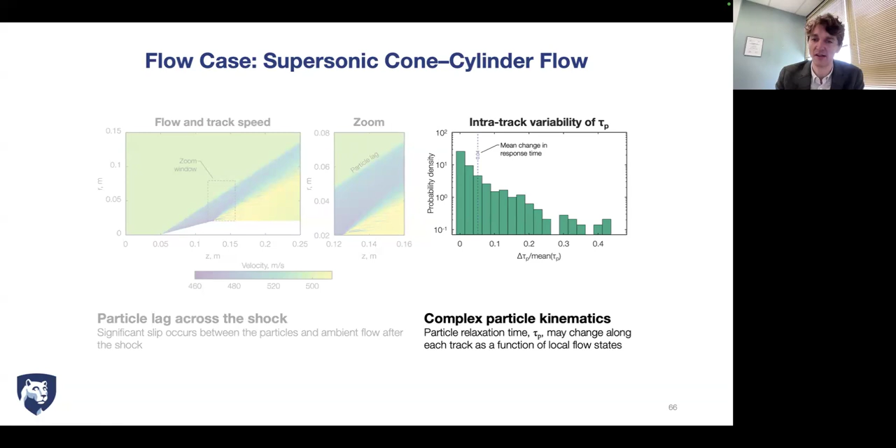This is just a probability density function of the change in relative response time of a single particle track. So that just says that you have to have the full particle dynamics. You can't just assume that you've got a static response time in a supersonic experiment.

But what I should say about this is that PINNs are really letting us do something here that people have not done without a PINN yet, which is to say that, to my knowledge, there are no LPT data assimilation algorithms that reconstruct velocity, density, and pressure from particle tracks for a compressible flow. And this was actually relatively trivial.

We don't need to do any sort of fancy numerics to handle the compressible Navier-Stokes equations. We compute an average inflow condition based on the stagnation conditions, and using that, your PINN can grasp the solution very effectively. And then we can do better still if we include the dynamics of the particles.

And so again, we don't know the size of any of those particles, and we've got a random distribution associated with the amount of agglomeration, which varies from particle to particle. And in reality, we'd also have a different density, but we didn't account for that effect here. And so we do the reconstruction where we're solving the Maxey-Riley equations and the compressible Navier-Stokes equations for that set of particle tracks.

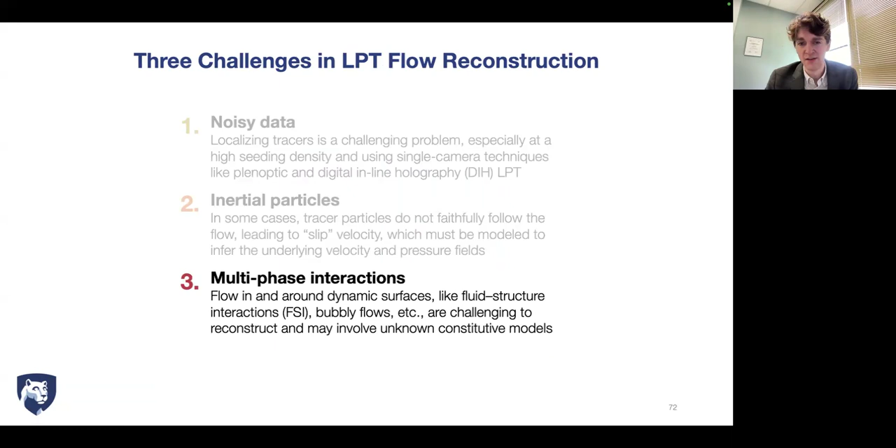Okay, I will not spend a lot of time on the multi-phase part, but in essence, you need to introduce a model to deal with a moving solid. And so we've got problems. They're actually mostly not involving PIV. They would involve 4D flow MRI, so a magnetic resonance imaging technique.

But we're using PIV just to make the point of how you incorporate a structure into your reconstruction here. And many of the solids that we care about, like I said, we don't have a constitutive model, so we're restricting ourselves to modeling the physics of the flow and the physics of that boundary condition.

So there's just two synthetic cases. We've got a flexible beam, and we've got a compliant pipe, and so we're going to send an impulsive pressure wave through that pipe. The beam is attached to a bluff body, so you're going to get a von Karman vortex street in the wake of the bluff body, and it's going to kind of talk to the surface there, and then you'll get this flexible behavior.

And so ultimately, we would like an arbitrary parameterization of the surface. But what we did as a first pass is we said, well, we'll have some modes available to us to represent the surface states. And that could either be through bending modes, which is what we did for the beam. So if you do have a reasonable constitutive model, you can just compute bending modes a priori. And for the pipe surface, we cheated. We just used data-driven modes. So we did a POD decomposition of deflections of the surface.

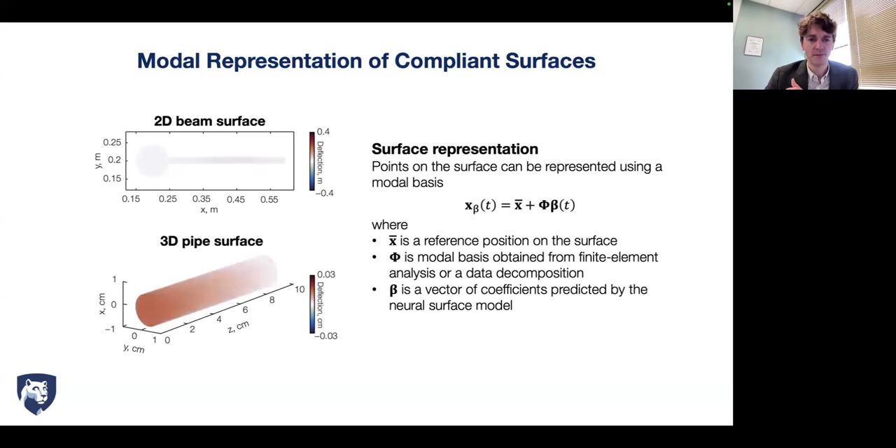But if I have either set of modes available to me, I can represent the surface as a mean surface position plus the modes times a set of coefficients. And we just have another network which describes those coefficients. And then we apply a moving wall boundary across the surface. And that's all that we need to do to incorporate this extra set of physics into the problem.

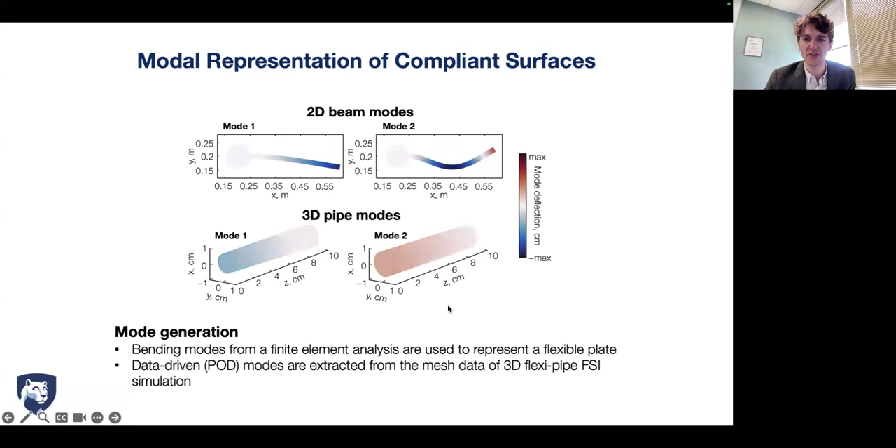So again, you've got these flexible modes. We didn't want to regularize with the number of modes, so we incorporated way more modes than we need. I'm just showing 2, but we used up to 8 or 10 respectively in these problems. And we're not sensitive to the inclusion of more or fewer modes. And these just show the modes that are responsible for most of the energy content of these surface fluctuations.

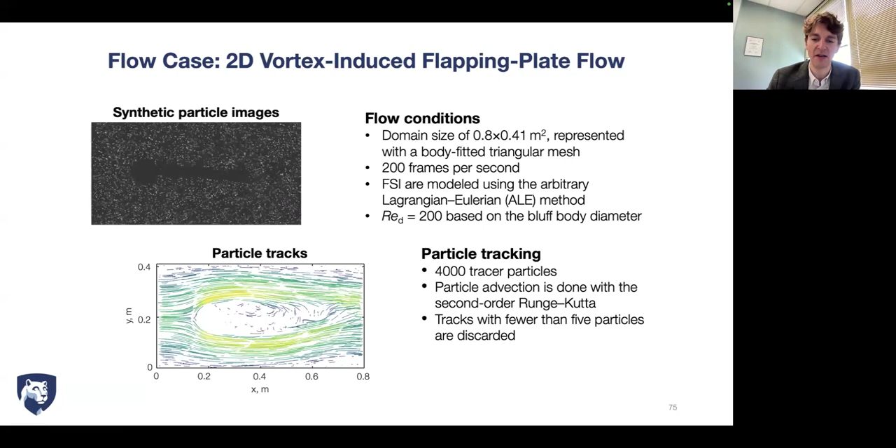And so we're going to be interested in how well we can reconstruct the dynamics of that structure from data that becomes increasingly sparse as you get close to the structure, where hopefully the PINN can use flow physics and that boundary condition to fill in the gaps.

And so this is a reconstruction of vorticity and pressure. So here you've got the exact fields on the left, and you've got the reconstructed fields on the right, and you've got errors. And so these errors are very low. So we're all single-digit percentage point throughout the field. And the modal response is correct for those leading modes. It's good for everything, but the energy decays quite fast.

You'll notice that you're not totally getting the behavior at the tip. And that's, like I said, you've got very sparse information at that location and really along the entire plate. But for the most part, you're getting the dynamics of that well. And to absolutely nail what's going on at the tip of the plate, you would need a much more precise solver. So, we're playing around with different ways to really drive the residuals to machine epsilon.

But at the moment, if you give the model full field information, you can drive the residuals to a tolerably low level, and you can really nail the structure response. But if we're just training on sparse data for the fluid, then we have this problem. And so it's possible that it's an information limit, but I think probably it's a limit with the precision to which the residuals have been minimized.

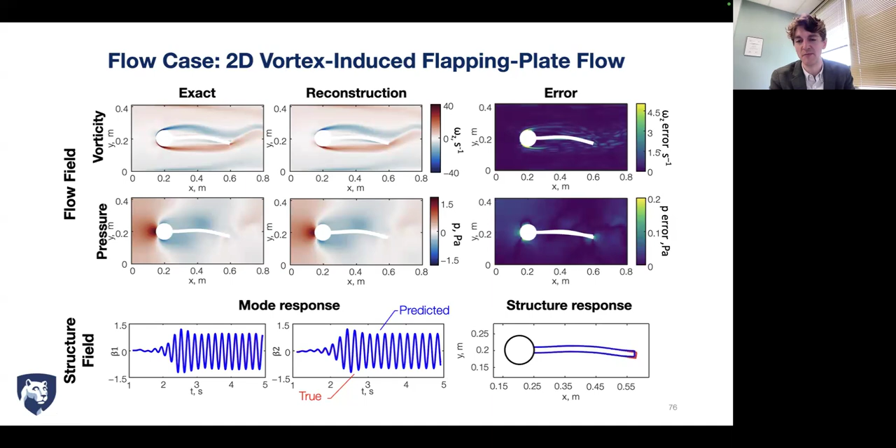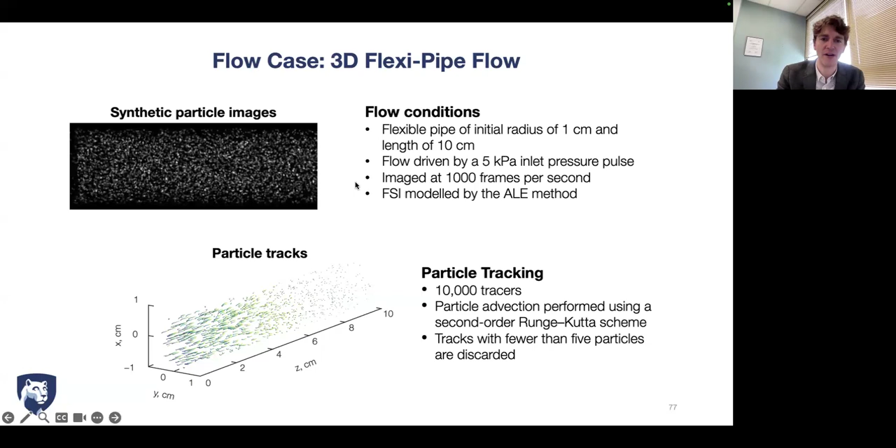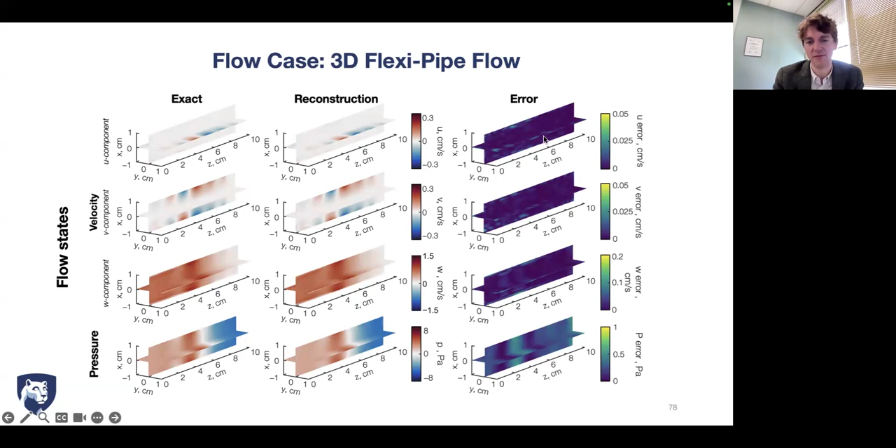We did the same thing for the impulsive pressure wave. So here the data is much more subtle. I mean, you can kind of see that wave traveling through the particles, but it's very minimal. You can see it a little bit in the tracks. And it's the same story as before. If we look at the UVW components of velocity and pressure, we've got exact fields, we've got reconstructed fields, we get very good results. We get very low quantitative errors. And we reconstruct the dynamics of that structure with a high degree of accuracy.

And so that kind of gives you a pathway for how to deal with FSI. And so to do this, it's a relatively challenging inverse problem if you've got sparse measurements of a single phase and you want to reconstruct a multi-phase process. But PINNs are very robust to inclusion of multi-fidelity, multimodal data, and we think that it's really the right tool to deal with that kind of a problem.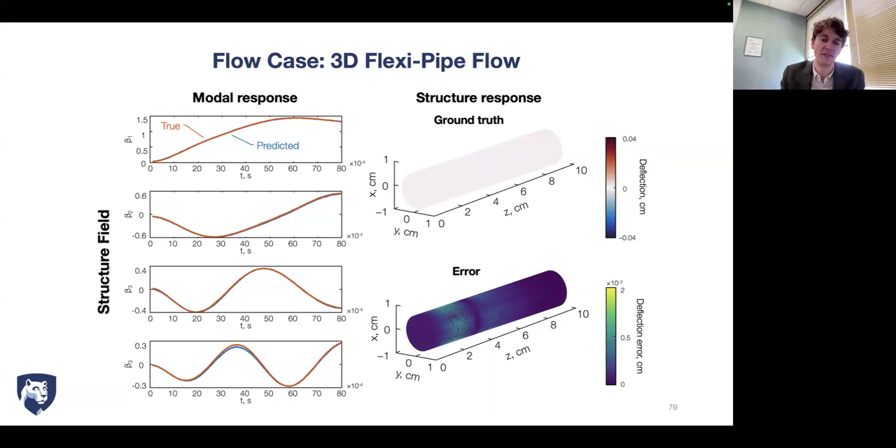And so in terms of wrapping up what I've discussed with you today, one thing to think about is what gives rise to the measurement you're looking at. So thinking about the distribution of noise, the fact that velocity might not actually be constant between frames, those become very important, and the fact that your particle positions might be in the wrong place. That's incredibly important to consider if you're processing real data, especially if you're trying to reconstruct high frequency energy content in a highly turbulent flow.

The Lagrangian particle tracking data is really rich. So despite the fact that we have in some cases very sparse particle fields, we can still get accurate velocity information in between the particles. So the PINN is not just interpolating information. I think it's nice to confirm that what the PINN is doing is it's actually grasping the dynamics of the flow at energy scales that are at higher wave numbers than the particle spacing, the particle Nyquist frequency.

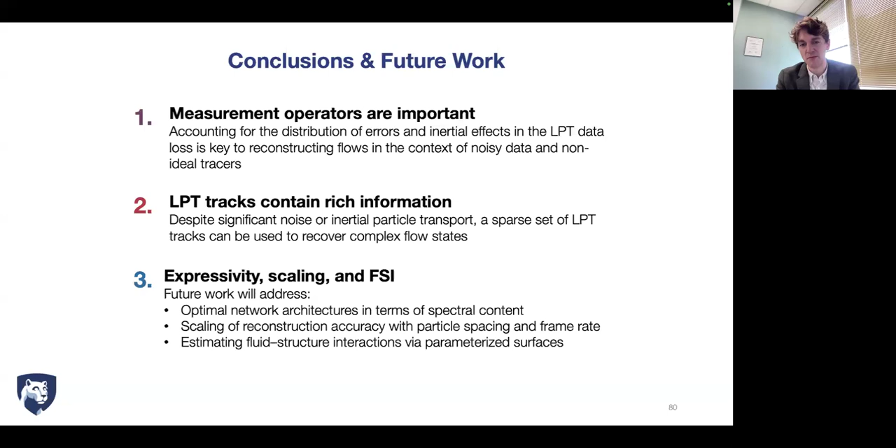And lastly, there's plenty of ongoing work to be done. So one of the things we're always interested in is how do we increase the expressivity of the network. And so multi-GPU models, for instance, or dealing with maybe a Kolmogorov-Arnold network using a spectral parameterization of the edge functions, as the Crunch group is now doing. I think there's many different ideas out there on how to do this, but this is kind of a pressing and ongoing research need, is how do you make these represent more turbulent flows over larger domains for longer time horizons.

And we're also interested in understanding the scaling of reconstruction accuracy with the particle density, sort of normalized with respect to turbulent scales. And lastly, when it comes to fluid structure interactions, we'd like to be able to take what we did as an initial effort there and make it much more arbitrary to the surface. So using either neural level sets or something along those lines, we want to be able to deal with a surface where we don't need an a priori modal analysis of the surface or a constitutive model to get the representation of the structure embedded in the reconstruction.

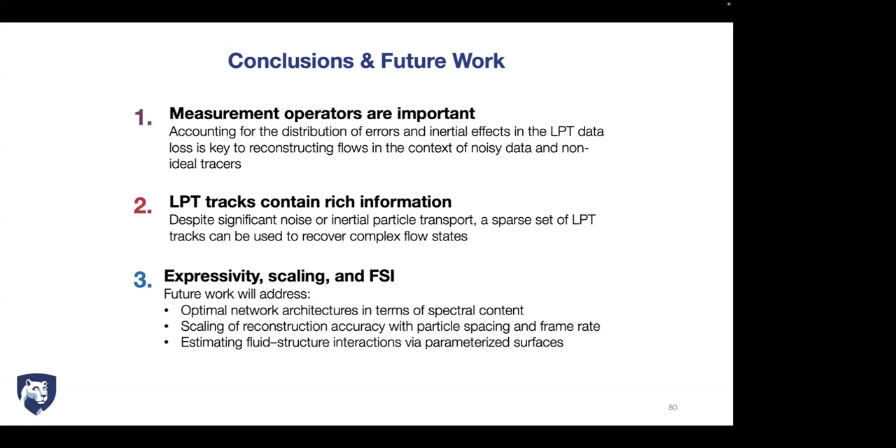But thank you very much, it's an honor to present to both you and George here. Yeah, no, great talk. Thank you. Thank you. Do we have any other questions or comments? Juan, you have questions? Or maybe Savas? So there's a couple of people who are doing imaging work. Yeah, I have a question. Savas, can you introduce yourself first? Yeah, sure. Hey, I'm Siavash. I'm doing a postdoc with George. I joined here a few months ago.

Yeah, so very nice talk. A lot of interesting results. So my first question is that in the supersonic example that you showed, the shock one, I'm assuming you use the residual loss from the equations, also the data loss, right? No. So you didn't use data loss? So those were synthetic cases. So the particle positions were assumed to be accurate, and we used the KCT formulation there, so the kinematics constrained tracks.

So the particle positions were embedded as a hard constraint, but the velocity history of the particles was optimized. And so the way that the data comes in is that the positions are fixed, but we don't know the velocity between them. And that velocity gets optimized such that between the flow velocity and the particle velocity, you solve both Navier-Stokes and Maxey-Riley. Okay.

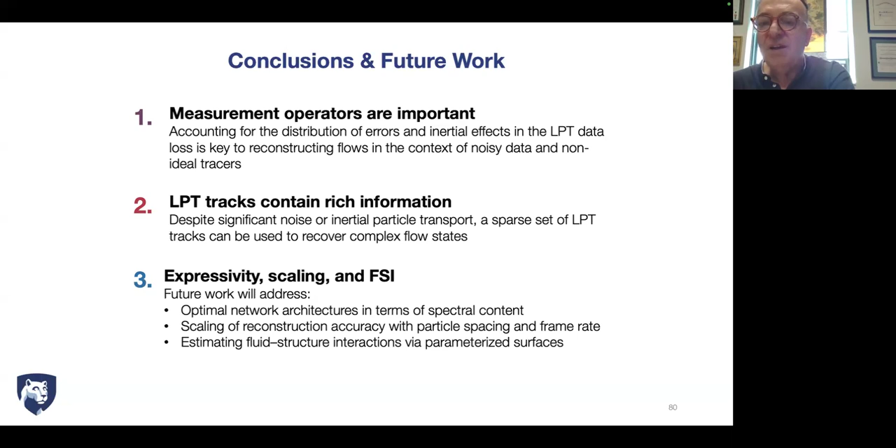Professor Mortari gave a talk here, but I don't think Savas was there. So we had a postdoc who was working on the theory of functional connections. So it's basically hardwiring the constraint, Savas. Okay, like the lifting method in Galerkin method, for example, if you have non-zero Dirichlet boundary condition, or varying boundary condition. So in some sense it is satisfied automatically, but not in the data loss. Not with the penalty constraint, yeah.

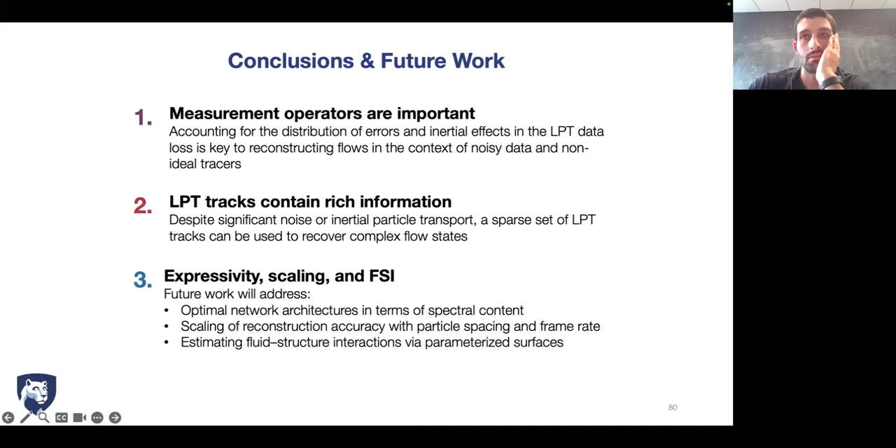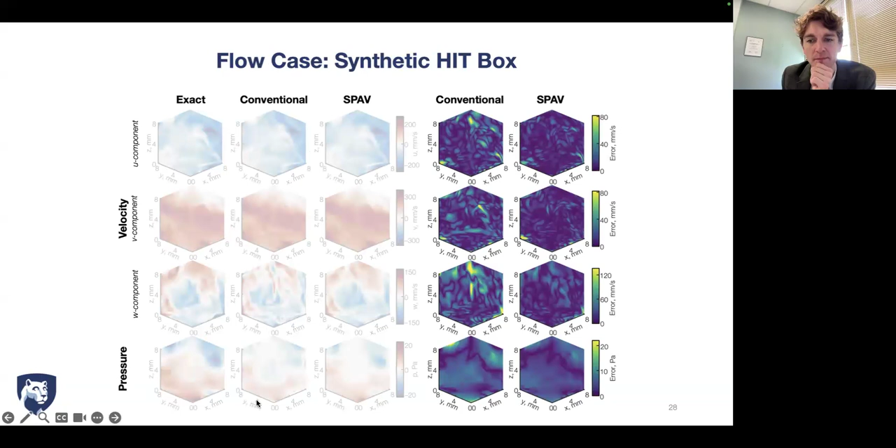Okay, I got it. And then can you go to slide 28? Yes. This one? Yes. Can you show these results, the conventional one and the SPAV one? So if you look into the W component, it seems to me that the SPAV is actually smoothing a bit, right? I'm guessing this is the noisy data, but in the future slides where you have less noise, SPAV is much better. Over there, it seems that the high frequency is being lost in the conventional method, but here it looks like it's being lost in the SPAV method.

Well, the conventional method doesn't get anything. Yes, it's giving the wrong answer, but the SPAV also seems to be smoothing, right? You're right. But if you look at the U and V components, I wouldn't say SPAV... Well, you're right, actually. It does look a little bit filtered, but actually, the high frequency content in the conventional estimate here is spurious. It's not actually accurate. And I drew attention to this for obvious reasons. But if you look at the errors, each component of error is higher for the conventional data loss than the SPAV data loss.

So I wouldn't say it looks like a lower frequency estimate, and in some sense, you have larger high frequency errors in the conventional. Sorry, I should have said that differently. I should say that the error content of the conventional at high wave numbers is significant, and you're kind of by eye just attributing that to the flow, but it's not correct. I mean, this looks smoother, but it's reconstructing the flow more accurately. Not sure if I'm saying that. I get, yeah, I get that.

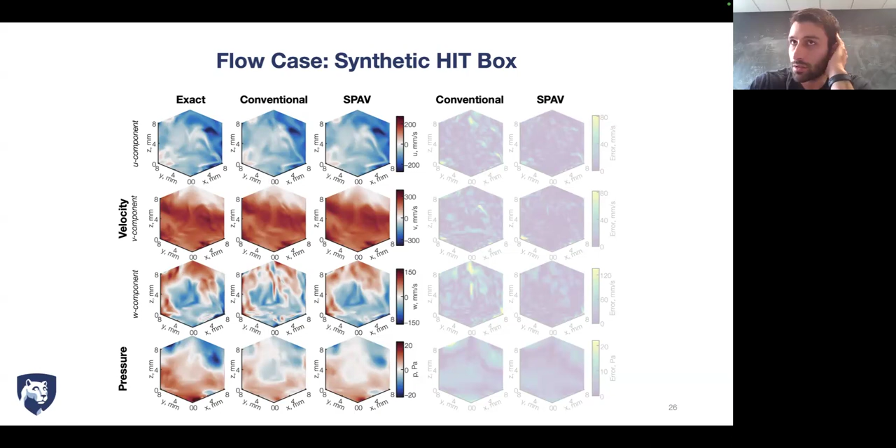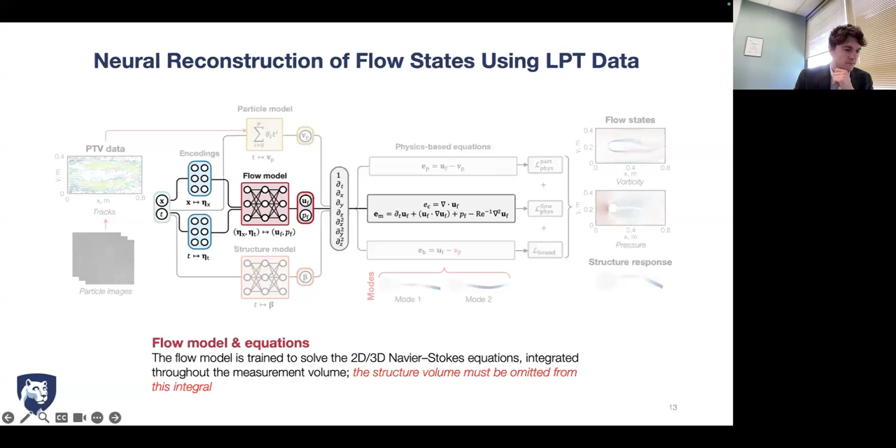And then one final question. Initially, you said that you have one encoding that you take it to basically Fourier domain. Is it right? Yeah, we use a Fourier feature encoding. So, right, it's encoding essentially a random Fourier basis. So you've got sine cosine pairs, and you have maybe 100 to 250 of these things. So I'm just wondering if you tested also what happens if you just use an MLP over there. Oh, then you get huge implicit regularization by the network. You lose most of the high frequency content. Okay, so it's right there.

Yeah. So this is a standard technique to deal with the multi-scale features, high frequencies. That's the spectral bias, basically. Paris and others introduced it a long time ago. Got it. Thank you. But I know that there was recent work using KANs from the Crunch group, and that should maybe have the same effect as using an encoding, or maybe even enable better reconstruction. So that's something we haven't tried yet.

Yeah, KANs suffer less from the spectral bias, but eventually it depends on the representation. But yes, different representations would give you that. But think of this as a feature expansion. Yeah, or basis enrichment, as it's called in finite elements.

Any other questions before I ask my questions? Okay. Maybe I can ask. Yeah, you can ask. Okay. First of all, thank you so much, Samuel. It was a really nice talk. Thank you so much for accepting the invitation.

I have a question here. First, for example, your Fourier features. I have played with them a little bit, and I agree that they work quite well. But usually they struggle when you have some type of noisy data. Because when you have noisy data, you will have some high frequencies that should not be there, but the model will try to get them. And if you don't train them carefully enough, your results end up being a bit messed up. So have you done something else when you deal with noisy data? How do you use the Fourier features?

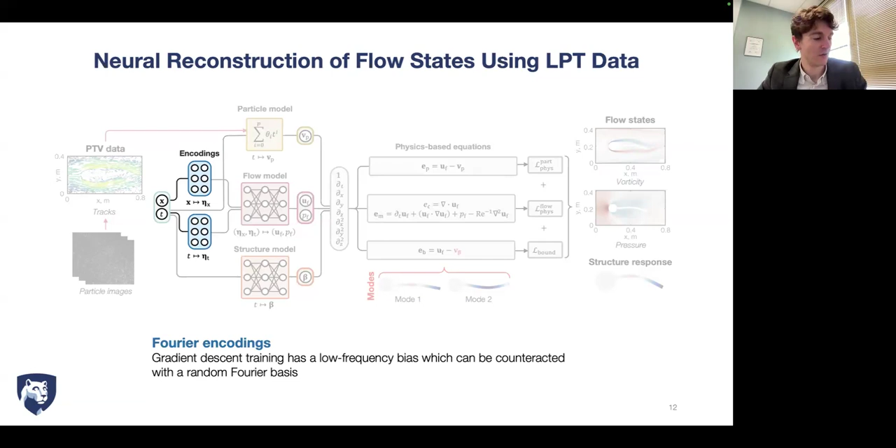Okay. Also, in that optimization, for example, when you do reconstructions, it kind of works because the data is telling you, it's not letting your model do crazy things, right? But when you try to infer things, there were some hard constraints that I could not use in my models, because when you're trying to infer hidden things, you have more freedom. Your model can go to many other places, and if you try to constrain things, it becomes harder

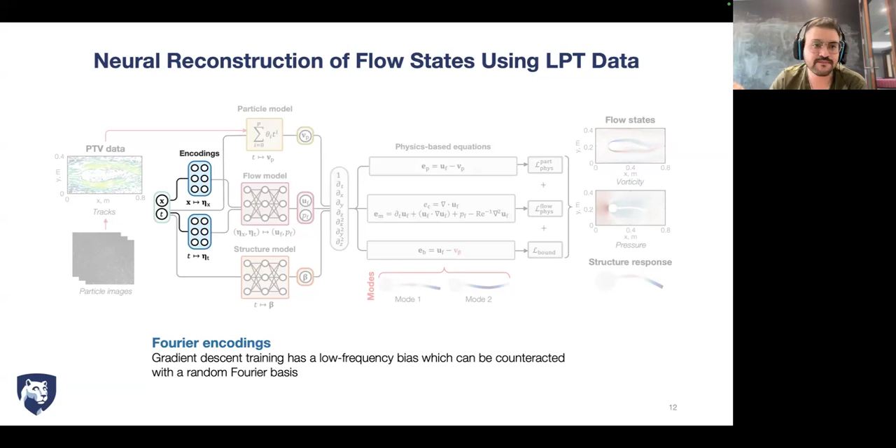to learn hidden fields. And that leads to my next question: did you try inferring hidden fields, like you have velocity in 2D and you want to infer the third component, or temperature? Yeah, so the pressure fields are inferred, right? There's no data about pressure in any of these cases.

And then in the supersonic flow, here we're plotting density and pressure. We've actually parameterized this in terms of a total energy field, and we're just computing pressure. So those would be the fields we inferred here. We do a lot of work with quantitative schlieren methods, which again has been done in the Crunch lab, where we infer velocity and total energy from a measurement of density, essentially.

In all of those problems, we haven't encountered a huge issue with the latent fields. I think the worst cases were when we were measuring a passive scalar and trying to infer velocity. That was pretty sensitive. If you have a low Schmidt number flow and a measurement of the scalar, we found it really challenging to get anything good out of that for complex flows.

Okay, that's nice. In general, I really like your work. It was really interesting. Thank you so much for sharing that. Okay, that was my question. Okay, so I have two questions. First of all, excellent talk.

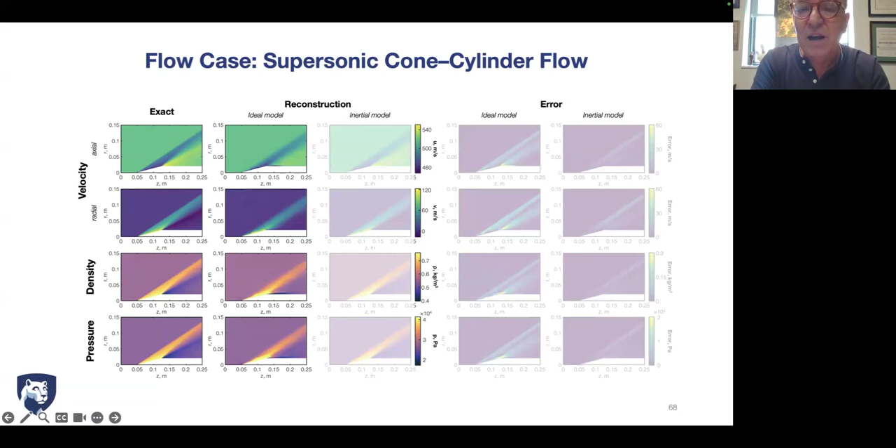Your examples were really great and carefully chosen to highlight the complexities of this, which we have also been struggling with and working on for some time. One of the issues you addressed was downsampling, because particle tracking velocimetry, PTV, is good, but you need a lot of particles. And you went down to 4 times. In the turbulent jet that we did with LaVision, instead of 16,000 vectors per snapshot, particles, we went down to

128. So severe, and we were still able to reconstruct the potential core, the breakdown. We missed some of the ribs in the streamwise vorticity. But we were able to downsample both in space and time dramatically, which equivalently means you can scale up the system, right? For the same number of particles, you can scale up from millimeters to meters, like in the project we're doing with Mercedes with the Formula One Lewis Hamilton car.

So the question I have for the technique: we used the conventional method. We don't know how accurate we were, but you could get something. If you downsample severely, you cannot use the NIPA method, right? But maybe the inertial particle could still be a good idea. The no-slip boundary condition could be a good idea, right? Yeah, certainly. In cases where you know the characteristics of the particle quite well, I think it would be beneficial to include that.